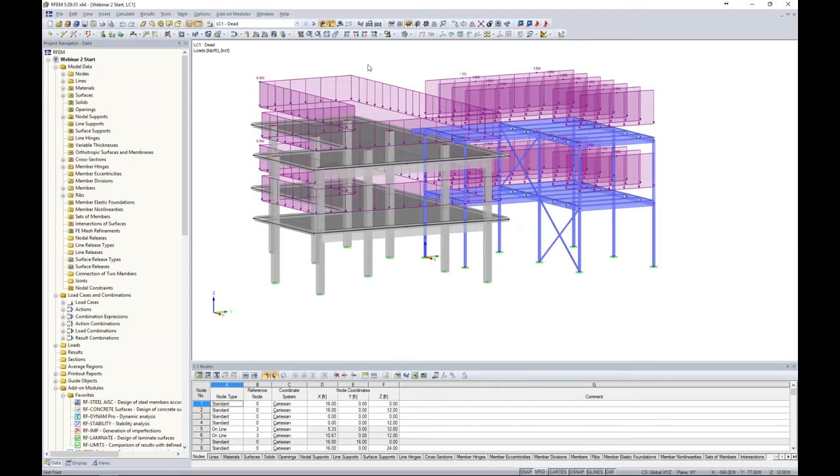Previously we loaded the structure, ran our load combinations, and got a full analysis. Now that isn't always the case - sometimes we go to run an analysis after loading our structure and issues arise. For example, we've loaded our structure with dead load here. Previously everything ran great, but as we know with any finite element software, that doesn't always happen. When we go to run this first load case, running according to a linear analysis, we immediately get an instability.

Instabilities are nothing new despite what program you're using, but I want to show you features that make our lives easier within RFEM. The first thing to know is the text about the specific instability. It says this model is unstable - the instability is found at FE node number 64, direction Z. So it immediately gives me a location and tells me there's some type of issue in the global vertical direction.

The model is statically underdetermined. When I close out of this error message, you'll see that my big red arrows show me exactly where FE node number 64 occurs. Now, I'm not going to say that 100% of the time this big red arrow is going to point out our issue, but a lot of the time this really is where the issue is occurring.

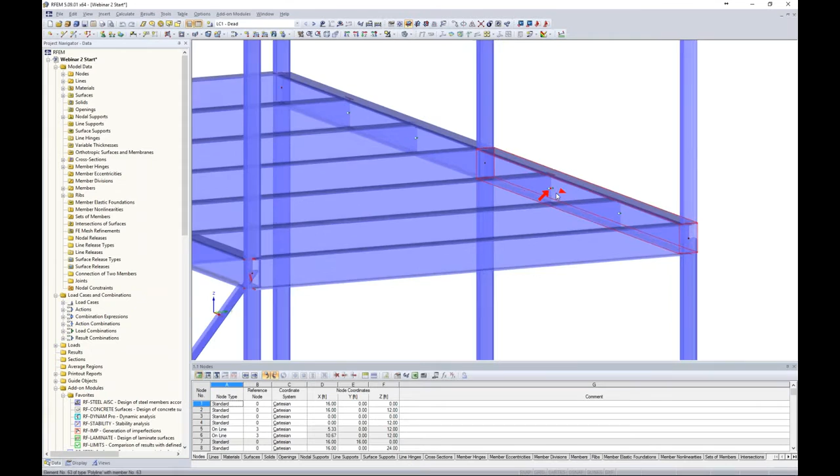So when I scroll in here, I really don't see anything immediately. When I turn it to a wireframe model, okay, well, I can zoom in here and see that I forgot to connect my node here of my beam to my transverse beam. Well, that's no problem at all. I can just easily drag and drop that to connect those two members.

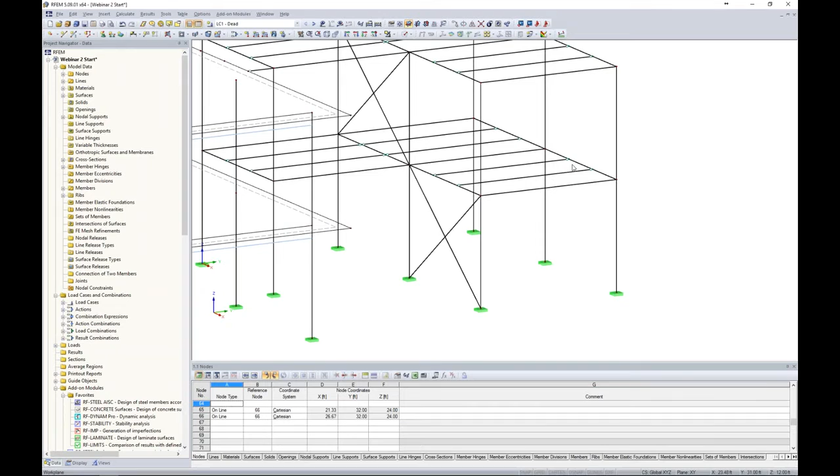So you can imagine that when we have a huge model with a lot of members and we get this error message for an instability, that red arrow is a huge benefit to really narrow down on where that issue is occurring rather than it being like hunting for a needle in a haystack, trying to determine maybe if a node isn't connected someplace.

So now we can go and run our load combination again, or this is our particular load case. We run it. Everything appears to run okay this time. We immediately get our deflections here, which we can decrease the deformation factor. So that's great, but now we need to run our first load combination, 1.4 dead load.

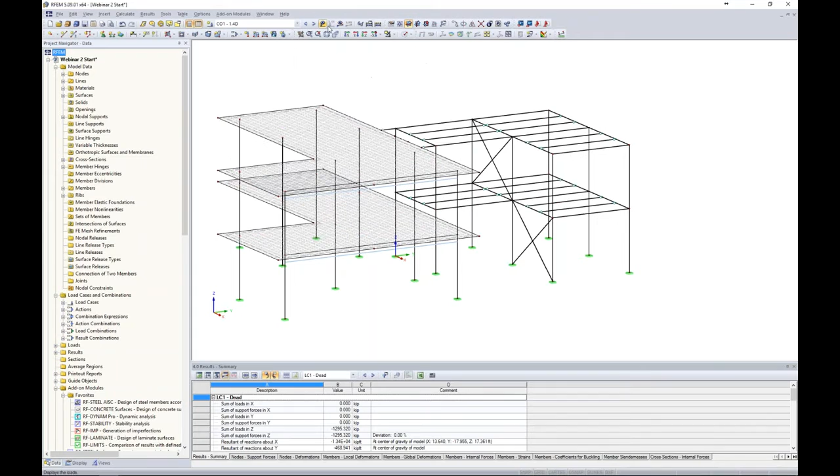So this is just a load combination from the ASCE 7. I take a look at my applied loads. It's applying that 1.4 factor to all of my dead loads, our surface loads and line loads here. And maybe turning this back into the rendered view, I begin my first load combination analysis.

And lo and behold, we get another error message. So it's another instability, but this time our text is a little bit different. It says our model is unstable and the instability is found at this location, direction X. So we have a bit of a different direction that it's being affected now. But this says a specified load is greater than the critical load. So this tells me that at this particular location I probably have some type of issue with buckling, because the specified load is greater than the critical load.

Well, I can close out of this error message and zoom into this big red arrow here. Maybe I turn this into wireframe. I see that everything is connecting fine. So I don't really understand where this error message could be coming from.

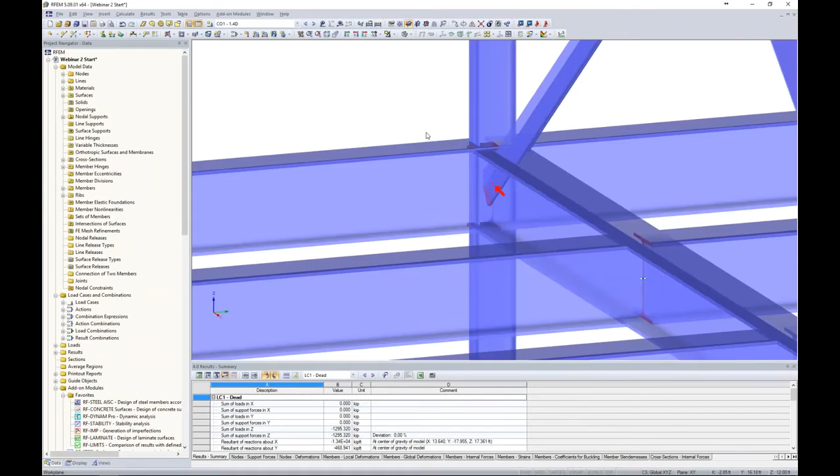Well, this is where we can utilize our add-on module RF Stability. So from our long list of add-on modules over here on the left in our project navigator, we can launch RF Stability. As you can see, this is just a simple dialog box that pops up within the program, and it allows us to do an eigenvalue analysis for a few different eigenvalues based on the buckling behavior of our structure. And what we can do is import different axial forces from either load cases or combinations.

Now, because I was able to solve for my first load case, dead load, just fine, it makes sense to import in those axial loads to see how the structure is behaving based on those applied axial forces. Now, we have quite a few other settings here that I won't get into in too much detail, but we do have an option down here that I can calculate an eigenvector for an unstable model. So this is if I couldn't get the model to solve at all, so that the causes of the instability can be checked graphically. So this is a feature too if we couldn't even get our dead load to solve.

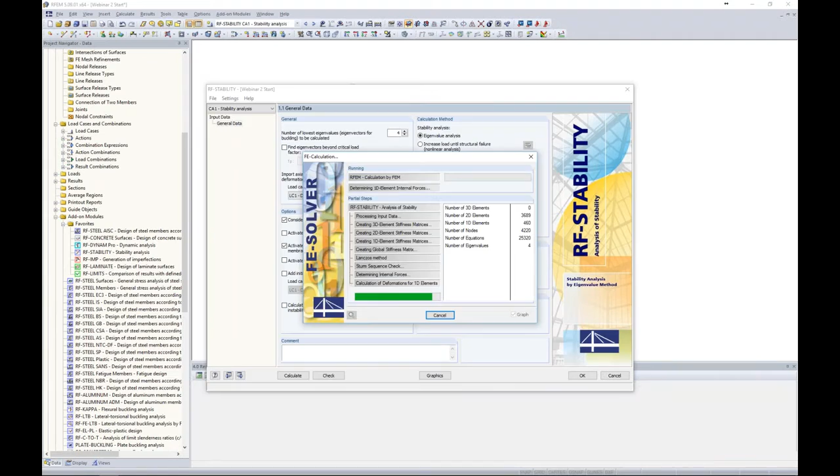Now for this, I will run the calculation, and it quickly runs the different 4 eigenvalues. I'll now see my results available in my tables here. So you'll see I'll have 2 different columns. The first is the critical load factor.

Now the critical load factor is just a factor that I can multiply that applied dead load by before I'm going to see the associated buckling behavior. We have 4 different eigenvalues, so the critical load factors are listed here in ascending order. So probably our most important one would be this first eigenvalue. Now the magnification factor is just a relationship between the moments of a linear static analysis and a second order analysis. So essentially, my first order moment times my magnification factor is going to give me my second order moment. But now we're a little bit more concerned with this critical load factor.

So if I take a look at my graphics, we're still in this add-on module RF Stability. We can see with our drop-down box here, I have my 4 different eigenvectors. Looking at the first eigenvector, we can see the buckling behavior of this structure.

Remember, I can only multiply my dead loads by 1.03 before seeing this type of behavior. If I look at the other eigenvectors, same type of behavior. It all has to do with these slender columns here. So when I multiply my dead load by 1.03, I see this buckling behavior. So when I'm trying to run 1.4 times my dead load, that's where our instability is coming from. These members simply can't handle the applied loads.

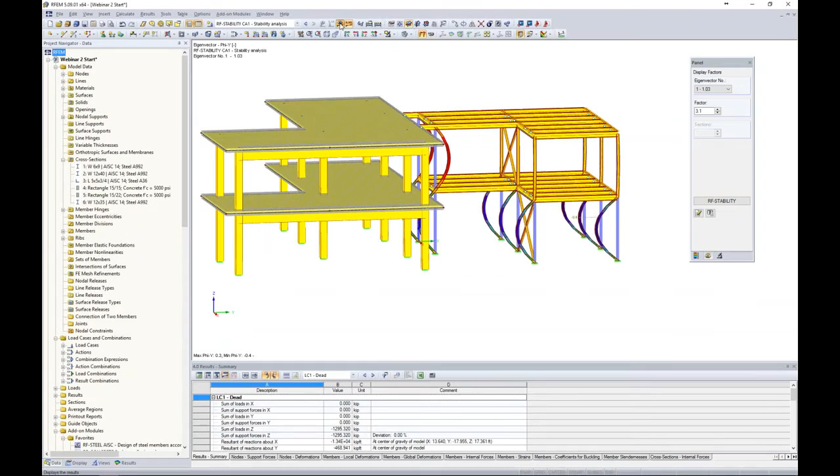So back under my Data tab, at the very top is all of my input data. I can take a look at my cross sections, for example, maybe turn off my results here from RF Stability. I click on my first cross section defined. It's a W6x9, a very small number. So perhaps I want to increase that to something a little bit larger.

I can just right-click and edit all of these cross sections at once because they're assigned to a single cross section within the program. Open up my cross-section database, and here are all of my AISC shapes. We would like to choose something more like a W10x49, much bigger than a 6x9. Still A992 is okay, but obviously we're going to have a bigger cross-section here.

I click OK. It's asking me to clear my results. Now when we go to run our 1.4 dead load, run the analysis, everything should run fine because now we have a little bit more of a sturdier member there and we don't see that same buckling behavior. So you can see how RF Stability is extremely useful, not just if you have an instability, but if you want to see the different buckling modes of your structure. I did a few other webinars where I utilized RF Stability to export imperfections as well.

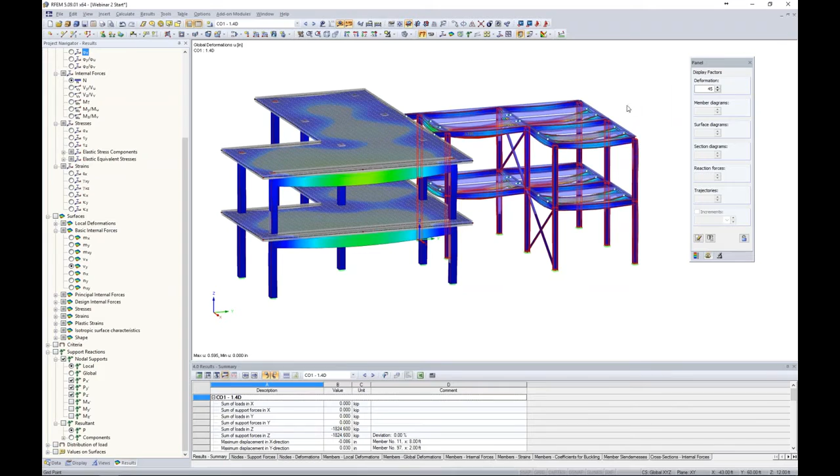Okay, so now that we've addressed instabilities, I'd like to move on to singularities. The first thing to do is turn off our results, and let's take a look at the top surface here of our concrete structure.

If I drag my selection box over that top surface, I can use my drop-down box here to create a visibility by selected objects. You can always right-click and show the hidden objects in the background if you'd like, or right-click and turn that off so we get a clean view of only the structure we've selected.

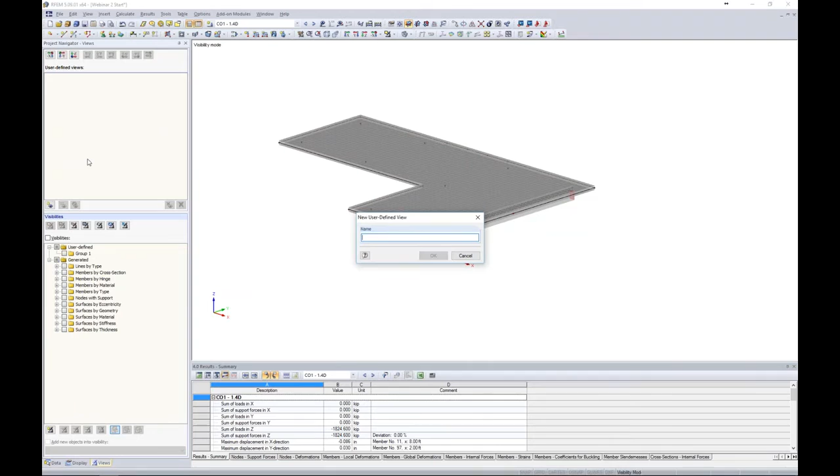Under Views, I can create a new visibility, and we'll call this Top Slab. I click OK. So now I have this user-defined view under Views that I can always refer to despite whatever view I'm currently in. So this is the case when we go to show the hidden objects in the background and show a wireframe view, that members are always 1D elements in a finite element software. Now our surfaces are 2D elements.

But the problem is that where we intersect this column to the 2D surface, the intersection occurs at this teeny tiny FE mesh element right here, a single node point. So we can imagine that all of our force transfer is occurring at this single point. Inevitably we're going to get very high stresses, very high forces. If we go to design this concrete slab, we're going to get high reinforcement simply because it's a product of the high internal forces at this location.

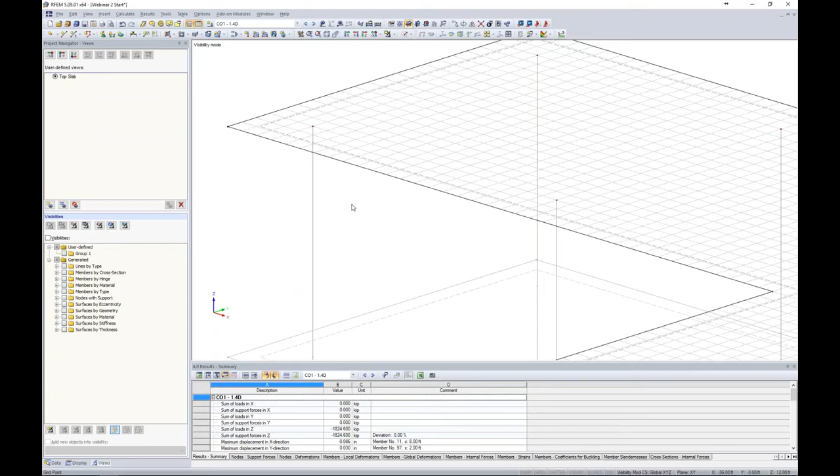Now in reality, when we render this, these columns are 15 inches by 15 inches, so we are going to get some load distribution. Like I said, this is not just for our program RFEM, this is common in any finite element software. So what tools do we have available in RFEM to help us address this so that we are not overly designing our structure?

Well, the first thing I'm going to do is jump to a different model here that I have saved, and I've gone ahead and used our add-on module RF Concrete Surfaces to do my reinforcement design. Now I have an entire hour-long webinar dedicated to just surface design using this add-on module, so we won't get into it today. But again, if you're interested in how we can do reinforcement design for this, refer to that YouTube video.

So once we run our analysis in RF concrete surfaces to get design per the ACI, we have our different required reinforcement. The first is AS1 in the top direction. Judging by this red arrow, we can see the reinforcement direction, and you'll notice that where these columns are framing into the slab, we have high reinforcement given there. The same goes for AS2 in the other direction.

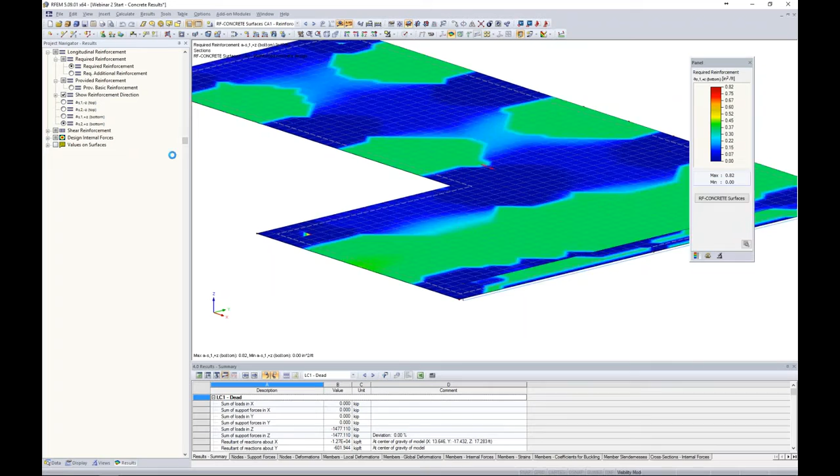Now, when we're looking at AS1 at the bottom, it's not the same, which makes sense. We have a lot of bending at the bottom of our slab between our columns, so that's where most of our bottom reinforcement is going to be. Same with AS2 at the bottom in the other direction.

Now, focusing on AS1 top for our slab with this particular reinforcement design, this is nice in terms of our contours, but perhaps we'd like to see this in a more numerical value. Well, we can do so with sections, and what we will do with our first section is up here in our dropdown, we can create a new section numerically.

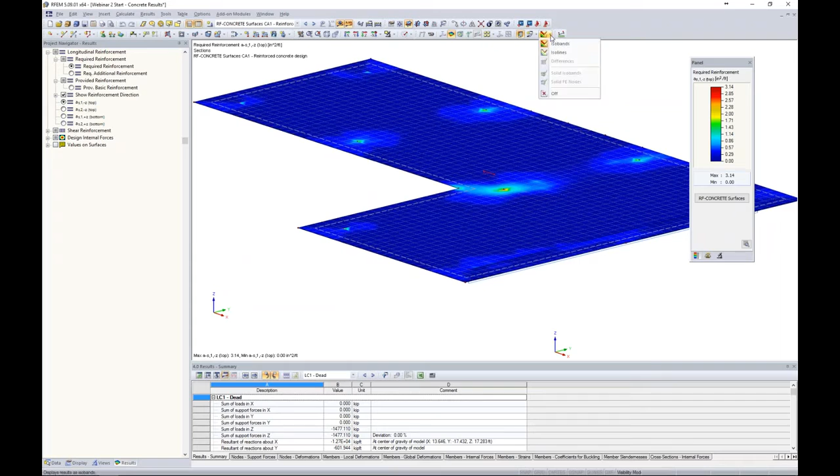But before I do that, right next to it, we have the option to completely turn off our ISO lines. These results will still be available, but I'm just simply turning off those ISO lines for the sake of making my section cut right down through the center of my slab. A section is exactly what you would think of it. It's going to give me the internal forces or my results at that particular location. So we can create this section numerically.

Now, the first thing I need to do is give it a section name, section 1. It will be a section cut through my surface, and I can apply this to my single surface number 2 here by clicking on that graphically.

The next thing to define is my start and end points for the section. What I like to do is maybe turn on my drawing grid down here, and I can activate that, change my origin for my drawing grid, and choose my 2 points here by zooming in, right down that column line. My second point will just be located at the second end of my slab, and because of those AutoCAD-like features, the program does a great job of snapping to those points I most likely would want to place my section.

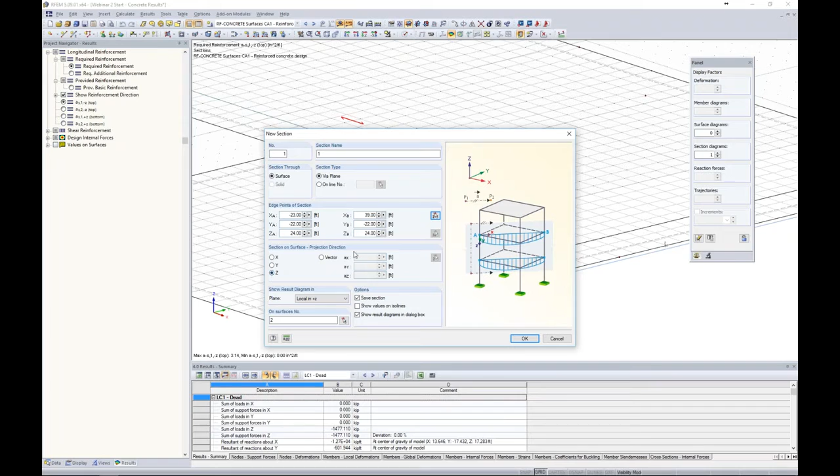Now, the section on surface, the projection direction, we can have it in the global X, Y, or Z orientation, or we can define our own vector if we want it at some type of angle.

Once I click OK, it immediately brings me into the results diagram for my section, and you'll see our exact same results that we were viewing in RFEM, and in particular, we take a look at our reinforcement design per RF concrete surfaces. Here are those spikes in reinforcement where our columns are framing into our surface. I think we can easily say that this is being over-designed for those internal forces.

Now, I can always exit out of here and view these surfaces, as you can see graphically on my surface as well. So going back to the results diagram by right-clicking, I want to show you guys a useful feature called smoothing ranges. Up at the top is the option to edit our smoothing ranges.

Now, my first column occurs 3 feet from the edge of the slab. My second column occurs at 20 feet from the edge of the slab, and my third at 41 feet. So what I'd like to do is smooth out the range, maybe 1 foot on either side of the column for a 2-foot range there. This is to account for the load distribution that's occurring, which in reality the program's not accounting for.

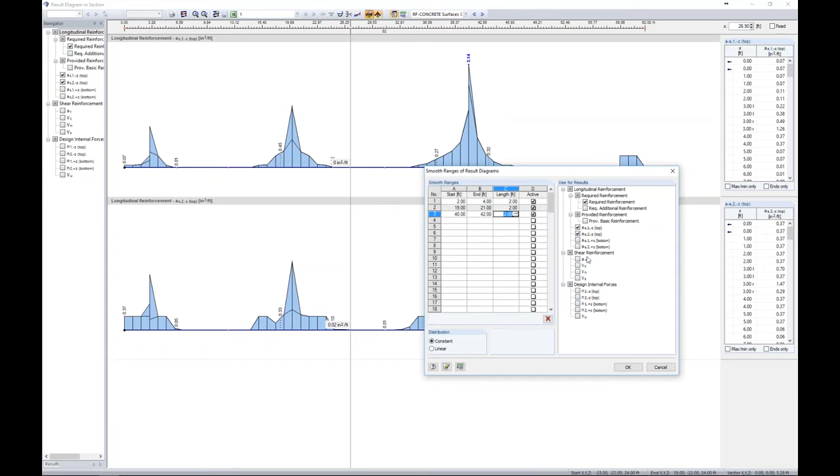So what we can do is define our different ranges. For example, for our first column, the beginning will be 2 feet and the end will be 4 feet. The program automatically calculates the length as a total of 2 feet for that first smoothing range. The second will be from 19 feet to 21 feet, and lastly, for our third column, it will be from 40 to 42 feet. The program automatically assumes that we'd like to apply these smoothing ranges to what we're currently looking at, but we can always activate and deactivate different results available here. So now when I click OK, you can see the smoothing range applied.

For example, column number 3, we went from 3.14 inches squared per foot to 1.65 inches squared per foot. This is extremely useful since we can print this to our printout report. We can even use this drop-down box to pull up one of our other load combinations.

I'm going to clear out all of these result diagrams and just activate my MX and MY. Again, we're seeing those spikes in internal forces here. I can go back to my smoothing ranges and simply activate the checkbox for MX and MY for all 3

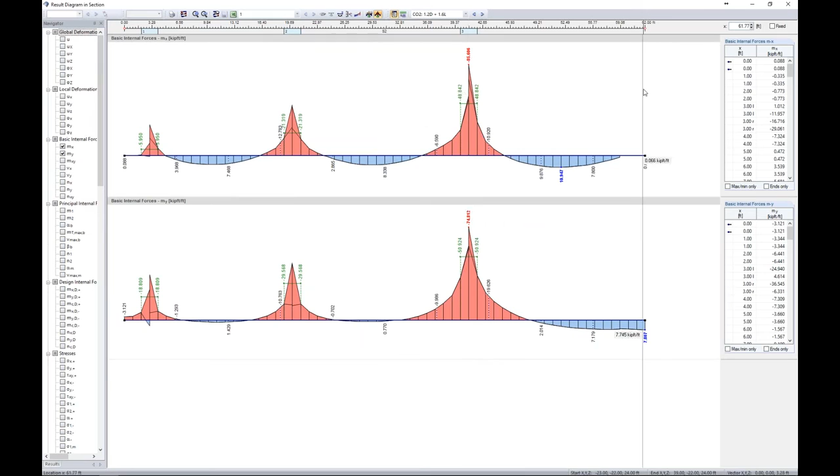of these ranges. So now when I click OK, you're going to see the smoothing range applied here as well. Now, one thing to note, if we jump back to RF concrete surfaces, for example, the smoothing ranges are shown here, but if I were to exit out, they are not shown graphically here within the model.

So the question is, that's great, but how can we apply this so that the program actually designs for those average forces rather than us just putting a fictitious number after our results are shown in the smoothing ranges? One thing I forgot to mention, if we take this section cut and highlight it, hold down our control key, maybe we want to copy it down this other column line to give us some perspective on some high design forces at this location.

So smoothing ranges are great, but if we go back to our data tab, we will see these sections available here. We have section 1 that we just created, and here's our second copied section. There's another feature called average regions.

So if I right click, I can create a new average region. Now for this, we want to apply it to a particular surface, so I graphically select surface number 2 here. You'll notice that I have 3 different forms I can select for my average region: a rectangle, a

circle, or an ellipse. For our particular case, our columns are rectangular in shape, so it's probably most beneficial to use a rectangular averaging region. But maybe you have a circular column framing into this slab, so that can be utilized as well.

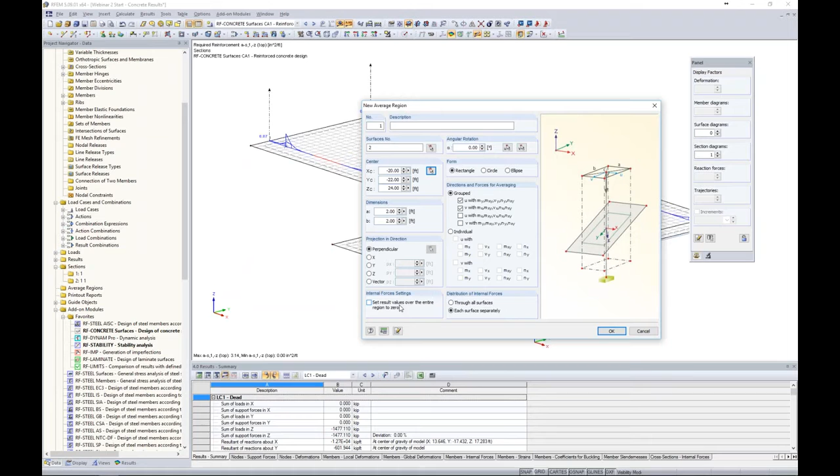The internal force settings even give you the ability to set all result values over the entire region to 0. This might be beneficial if we're checking punching shear for a column and we're really interested in the shear at the critical shear section, and we don't want to design for anything within that critical shear section. So if we click OK, then we will get our first average region.

Now, to make this very clear what we're doing, I'm going to jump to one of these particular load combinations, and under my results, I'm going to activate my sections. So we're still viewing our sections here, but for my MX forces. This isn't my concrete design now, this is my internal forces MX.

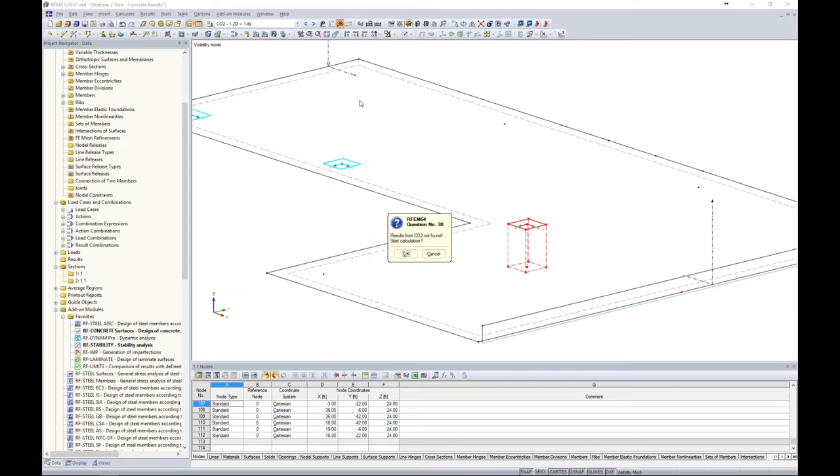Now with this average region, all I have to do is select it, hold down my control key, and then I can take it, drag it, and drop it. It's asking me to clear my results, that's fine, and drag and drop it to some other regions here. Now I can rerun that same load combination rather quickly, and we will see that average region now applied. Previously this was something like 83 kips per foot, so you can understand that this is now going to give us less internal forces.

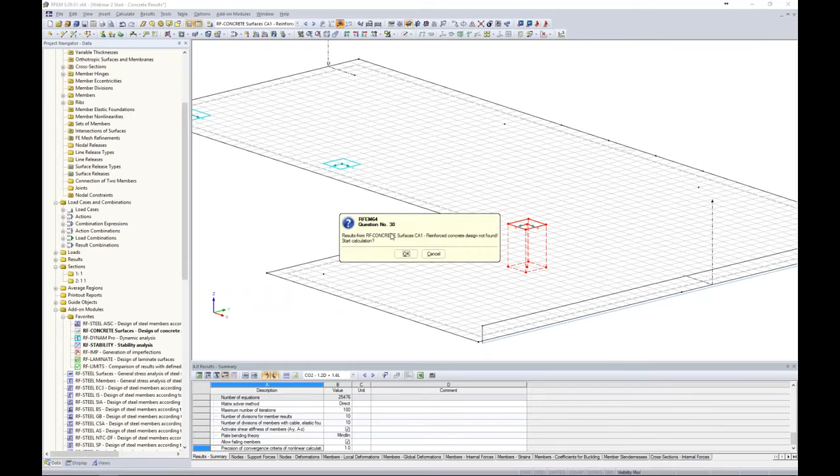Now if we jump back to RF concrete surfaces, it looks like we lost our results here, so I'm just going to quickly rerun that.

All this is doing is applying the ultimate limit state designs for all of my load combinations to do my reinforcement design. But what I want to show you with these average regions is that my AS1 top is still showing 3.14 inches squared per foot.

So this average region did absolutely nothing to help us with that. So why is that? Well, back under the data tab, under Concrete Surfaces add-on module - for a more detailed look into this add-on module, refer to our previously recorded webinar. But when you are using average regions for concrete design, under the Details tab, this option is default to be checked off.

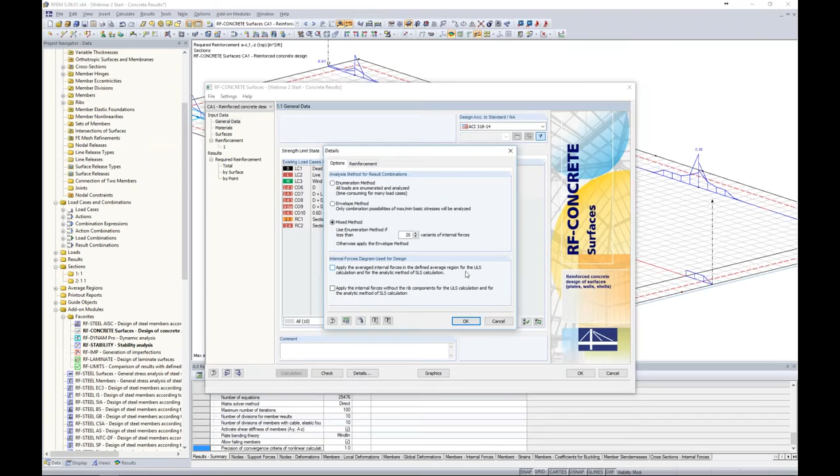What we'd like to do is apply the average internal forces for our ultimate and serviceability limit state designs, so now we want to check this checkbox. I click OK, I click OK. We've lost our results again, but we can easily run a quick analysis, which solves rather quickly because now it's taking those average internal forces to give us our reinforcement design. So now we have gone from 3.14 to 1.83.

So this is how we can apply those average regions to address singularities within the program, especially for something like concrete design. Okay, so that is what I wanted to look at in terms of singularities.

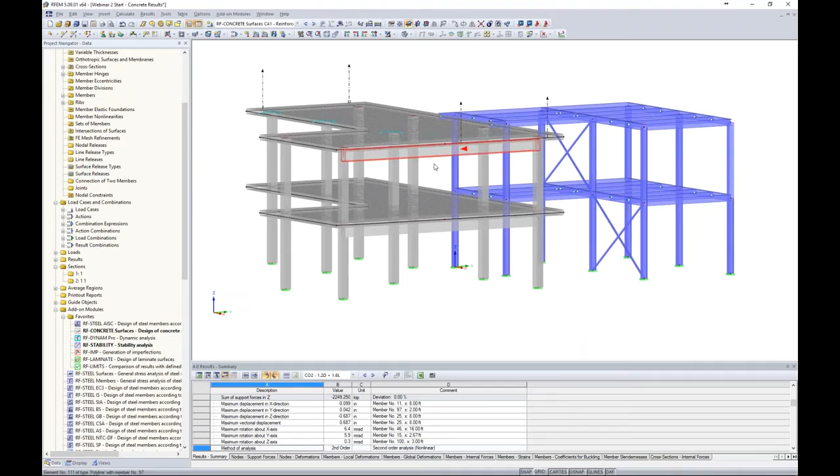Now, switching topics, I'm going to cancel my visibility mode here and render my model. In RFEM Webinar 1, if you were present, we created this beam member here, and it's actually a rib because we wanted to span from this column to this column, but we didn't have an intermediate column, so we thought it'd be best to apply a rib member there.

Now, if I were to double click on this rib member, you can see that the member type is actually set to that. Previously we had defined effective widths for this rib member to take that into account for analysis, but also designed for our reinforcement per the ACI.

Now, let's say we have a situation where we actually have a precast element, and the precast slab is sitting on this precast beam - it's not a monolithic pour like what we'd see with a rib type member. In reality, I want to fully release the moment. Maybe I still have resistance for my lateral movement and my vertical movement, so X, Y, and Z is fixed, but no moment will be transferred between the two.

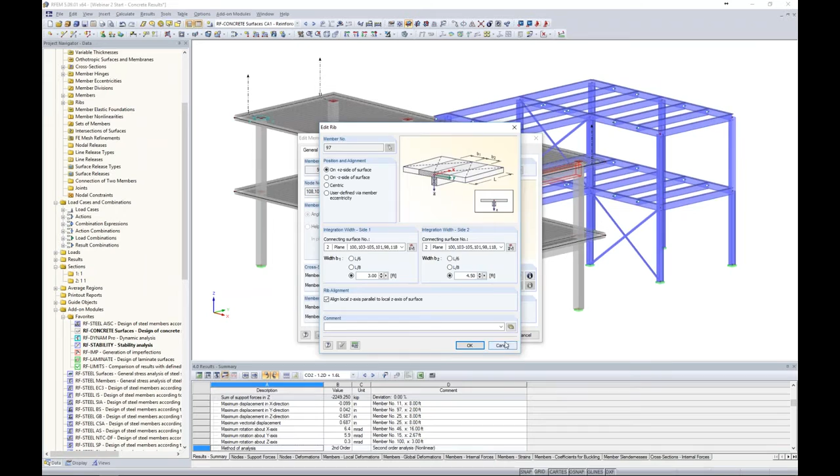So what I'd like to do is not have this set as a rib, but set it to a beam member. Now when I click OK and it asks me to clear my results, I take a look. My typical member is modeled directly at the center line, the same center line as the slab. But in reality, I'd like to still drop this beam down below the surface.

So how can I apply an eccentricity? If I double click this member, we have a tab here called Options, and that's where you'll see member eccentricity. Now we need to define a new member eccentricity. You'll see here that we have not only the local axis system X, Y, and Z for a member, we can also set it according to the global X, Y, and Z.

The local might come in handy because if we are modeling a member at an angle, we want to apply the eccentricity according to the local axes rather than the global. We can also apply this movement of the beam in X, Y, and Z, so not necessarily just vertical eccentricities, but left and right too. Typically with this situation, I would need to understand half the depth of my slab, half the depth of my beam, add those together, and manually apply my eccentricity. But we have automatic features in the program that can do all of that for us.

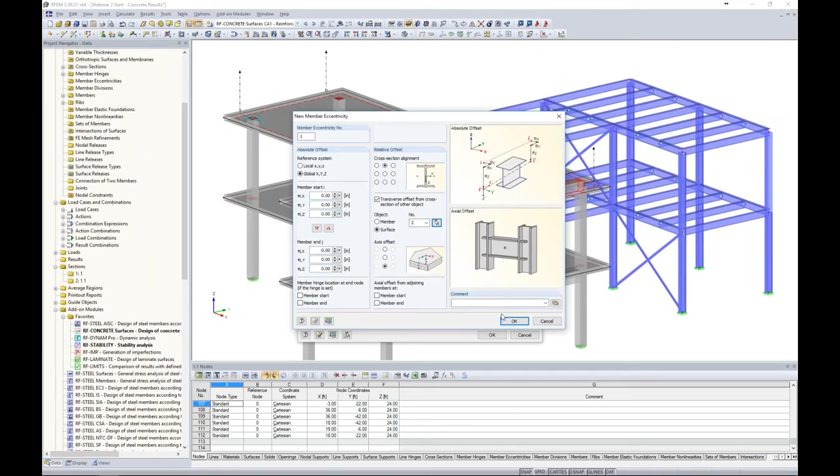You can see here that I have 6 different options of where I can select my beam to be, for the eccentricity to be applied to. This little red dot highlights exactly which option I've selected here. So I'd like the top of my beam, and I want to offset it according to a surface. Then I can graphically select my surface number 2 here, and offset it from the bottom of that slab. Now when I click OK through all these dialog boxes, we can see that beam was dropped down below the bottom of the slab. This is the same concept as the rib member, but now we're not taking into account that effective width.

One thing I'd like to do, I created this user-defined view of my top slab, and we want to render it again. What's going on behind the scenes, if we turn this into wireframe, is the program has dropped this member down below the slab depth, and it's applying little rigid links at every FE element along the member length.

The question is that these little rigid links have full fixity to transfer moment, shear, and axial forces, but remember, we're trying to alleviate these moment forces being transferred from the slab to the beam, causing high torsion within the beam. So how can we automatically do this without modeling individually these little rigid links, what we may have to typically do?

Well, in the program, we have a feature under data, and if I scroll up to my input data here, you'll see a line release. So what I can do is right-click to apply a new line release. The first thing the program asks me to do is define the line, and I will apply the line that I used to create the member.

If I try to click the member itself, it doesn't allow me to do that because that's not where the member was modeled - it was applied to this line integrated within the surface. Then we create a line release type.

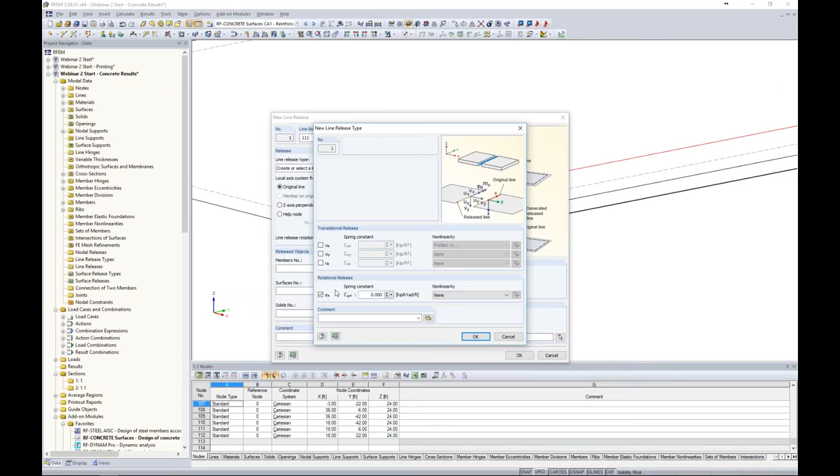Now, keep in mind that these are the local axes of the original line. Surfaces have their own local axes, our beam has its own local axes, and so do our lines. So we're not releasing any of the translation or rotation directions of the beams or surface, but rather the line itself. We are going to completely release this rotational release, phi x, and we can click OK.

We do need to define which is the released object. We will apply this to our surface number 2 again, and simply press OK, and we'll see the setting within the program that shows us that we have some type of line release, judging by this blue symbol.

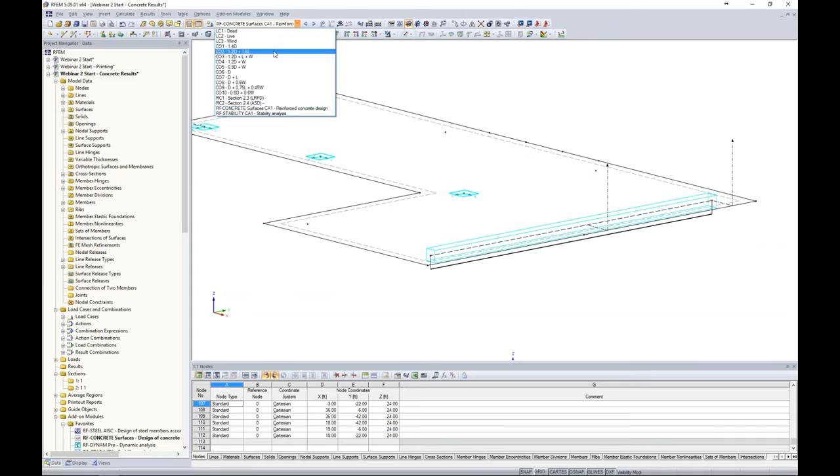So now if I were to run one of my applied load combinations, such as 1.2 dead, 1.6, we can run this load combination, and we're just viewing our initial view here. I'm going to turn off my surfaces, and we just want to take a look at our member design. I'm going to turn off my sections, and rather, we're taking a look at our members and our internal forces for torsion.

You can see here that we still have a small amount of torsion along the member length of 1.933 kip-feet. But what would this look like had we not released that particular moment along the member length?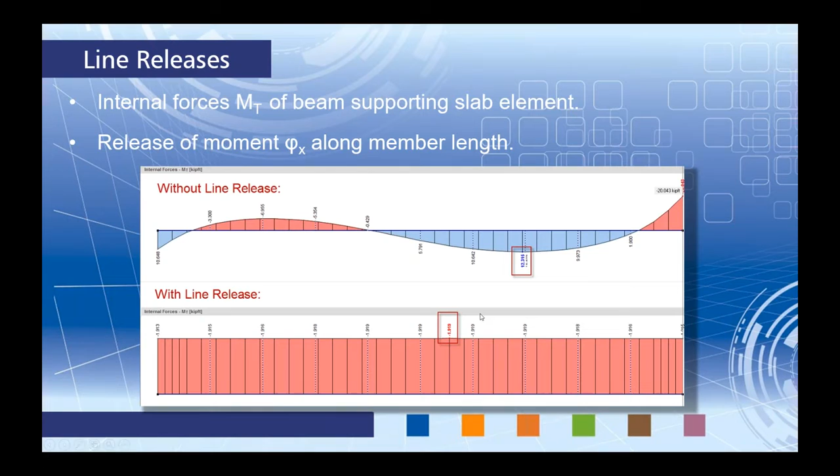So this is how we can effectively apply line releases in the program if, for example, we did not want to connect our surface to our beam element.

Changing topics once again, I want to move on to result beams. For this, I am going to cancel out my visibility mode here and render our model.

Let's say that I'm interested in only my concrete structure here, not my steel structure, and in particular I want to know what the story shear forces are, without incorporating the steel beams. So how do I easily pull that information from the program? This is where something like a result beam will come in handy.

So what I'm going to do is first create a new user-defined view here, using my drop-down box, visibility by selected objects. Keep in mind that behind the scenes, when I show my hidden objects in the background, this steel section is still here.

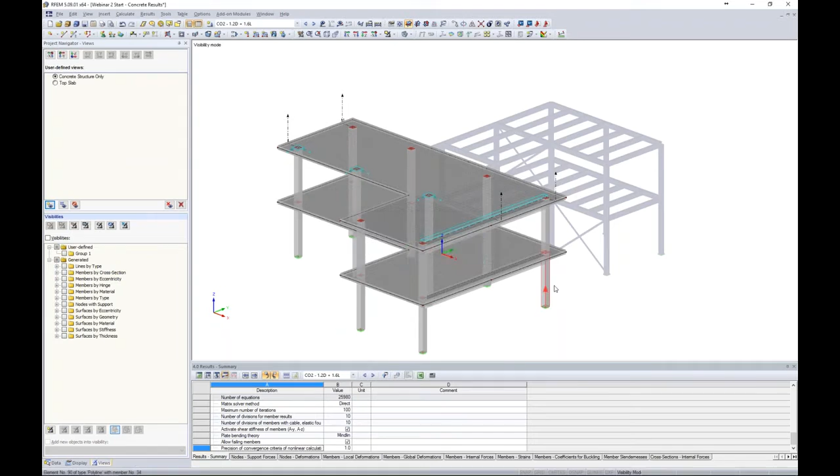So under my views, I can create this new user-defined view. We'll call this one concrete structure only. I click OK, and I'm going to turn back on my grid and redefine the origin at the base of my structure. I'm going to hold down my control key to select these two members, and holding down control again, copy them and drag and drop them to a location parallel to the concrete structure.

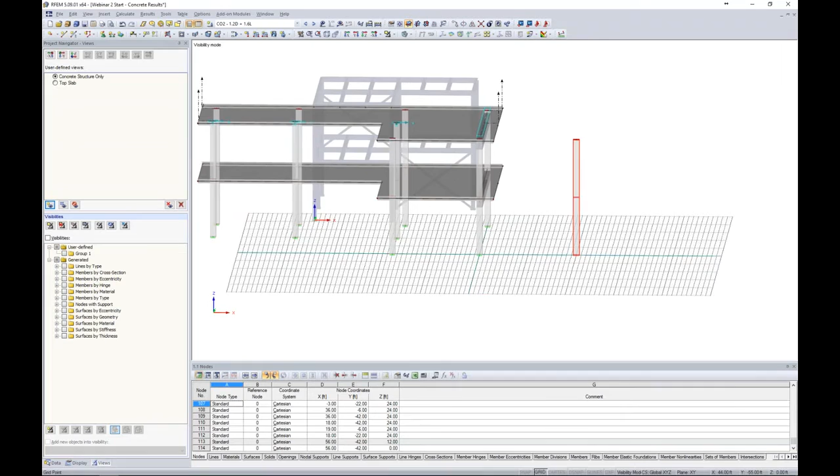So what I'd like to do from here is select these two members, right-click to edit them. Under the member type is where we can choose result beam. A result beam is simply going to take the information from other objects in the model and apply it so that we can view the analysis results as a member internal force.

Now, result beams don't add to the stiffness of our structure. We're not applying them to an analysis - it's just simply a different way to view our results. As far as a cross section, it doesn't matter if it's concrete, steel, aluminum, or your own user-defined section - you can choose anything here. You'll also notice I don't even need to put a support at the base of this column section. What I need to do here is define some additional information.

As far as result beams, we have 4 different options. The first is within a cuboid quadratic. This uses a quadratic integration area where the centroid of all the elements I'm trying to incorporate within this result beam needs to be located within the member's axis - meaning the axes of our actual result beam shown here.

I'm not going to use this option today, but we will be using this second option as our second example - within a cuboid general. This will apply a rectangular integration area where the centroid can vary according to the local axes of our member.

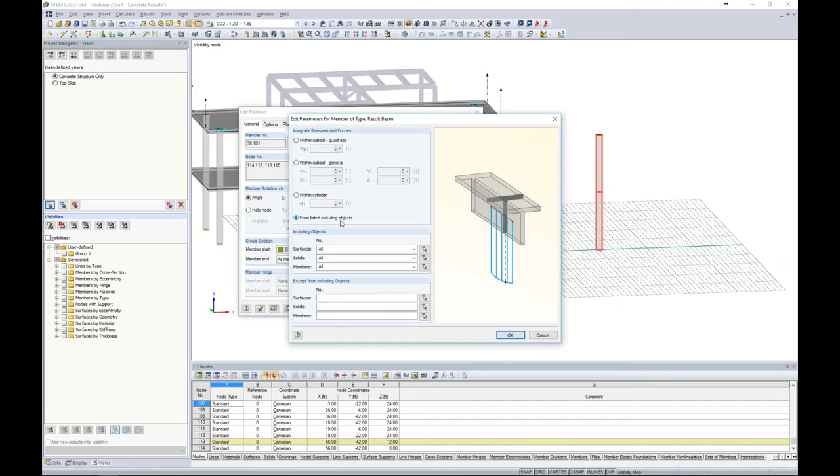So here is where I'm going to start off with my first example of a result beam. What I want to do is select my surfaces that I'd like to apply to this result beam, so I can just highlight everything. My steel is in the background, but because it's not selected, I don't have to worry about selecting anything from there. As far as solids, we don't have any, so we can leave this either as all or none. And for members, we want to graphically select all of our concrete members here.

I click OK. We can even exclude any objects from our selection if we'd like to here. I click OK, I click OK.

Now I'm going to run one of our load combinations where I have a lateral load applied. You can remember from webinar 1, we applied a wind load in the Y direction here with some gravity loads. So if I run this first load combination, you will notice that after the result is complete, I have my member over here with some results as well.

So what's exactly happening? Well, I want to view my results on my members like I would any other member within the model.

What this is doing is incorporating all of my objects here and applying it to my result beam. Just to summarize what's exactly going on.

As far as viewing my shear forces in the Y direction, and this is the local Y direction, I can always right click and turn on the local axes of my members to understand exactly which direction I'm looking at here.

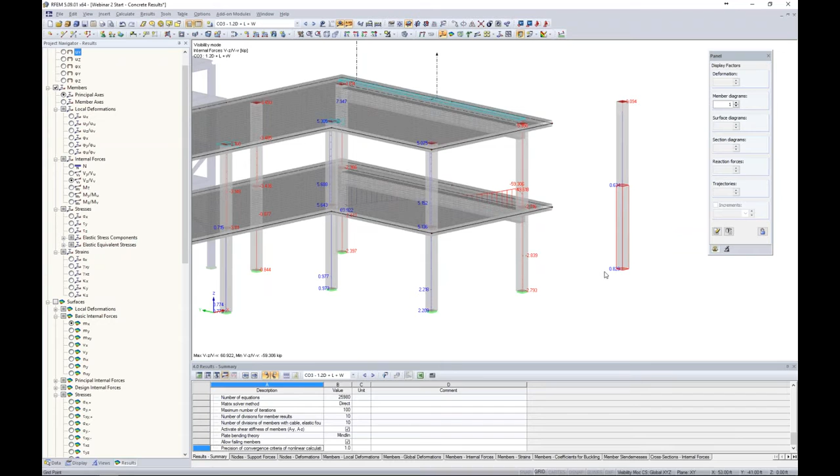The local Y is going to give us my story shear information. For example, the top story is going to be 10.46 kips for this particular load combination. My first story shear is going to be 39 minus the 10, and finally I have my base shear given here at 48 kips. If we take a look at our shear in the other direction, we hardly have any forces at all, that's just because we haven't applied any lateral loads to this. Now lastly, we can even take a look at our axial load.

So why would our axial loads be important? Well, if we're interested in the sum of our forces, I can see that for my concrete structure only, my sum of forces in the Z direction is 1,455 kips. Now this is different from my table down here shown in my results summary, which also gives the sum of the loads in the Z direction, but this is for the entire structure, including the steel structure over here. So again, result beam would be beneficial for only part of your structure here.

Now, the moments are not applicable in this case, and that is because we have moved the members of this result beam away from the centroid of the objects that we're interested in. So just keep that in mind when we're looking at something like moments, we can't get an accurate representation here. So I'll show you in just a minute how we can do so.

But first, I want to quickly jump back to the PowerPoint here to explain what's going on. So as you saw with a result beam, we're integrating the results from a list of objects. Now, these result beams only include the elements within a rectangular axis of the member start and end.

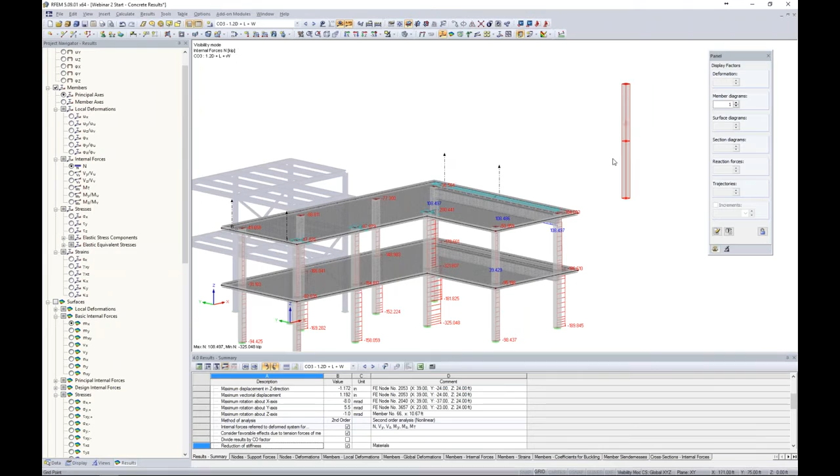Now, as we just saw with the axial and shear forces, the parallel distance from the centroid does not matter. So going back to RFEM, I can move this result beam every which way in the left and right direction. But if you take a look at what happens when I simply move it in the vertical direction, those results are now gone. That's because I did not move it in a parallel direction to the objects that I'm interested in. So that's the one way you need to make sure you're able to see your results accurately for your structures, to make sure it is parallel.

For example, if I'm interested in my top slab here, which we can go back to our user-defined views, and I really want to design a 4-foot wide section here on my slab, and I want to pull those internal forces from that 4-foot wide section. Well, a section cut isn't going to work here because a section cut only gives me my internal forces at that exact location, exactly what it is, it's a cut.

So in order to utilize a 4-foot section and to pull those internal forces, we want to use a result beam. So what we can do is create a new beam member here, and instead of the member type beam, we will choose result beam.

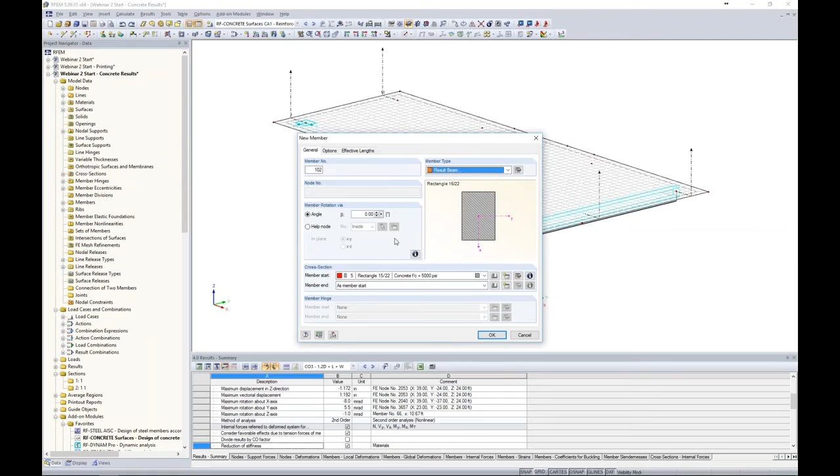And again, the cross-section does not matter. We could choose anything we like because we're not contributing to the stiffness of the structure in any way.

We want to move on to the details of this result beam, and this time I want to choose within a cuboid. So if I'm interested in a 4-foot section, that means I want to choose 2 feet on either side of my result beam, which is laid out clearly in this picture here.

As far as the vertical direction, this isn't as important because I don't have any members modeled above or below. I'm only interested in this slab, so 1 foot is more than enough. But if I had elements within this 2-foot vertical section, they would also be included in my results, so keep that in mind.

This list is no longer relevant because I'm using only this section up here. So when I click OK, I can begin modeling my new member. I will snap to the middle point of this line over here to make my result beam section right down the middle of this slab.

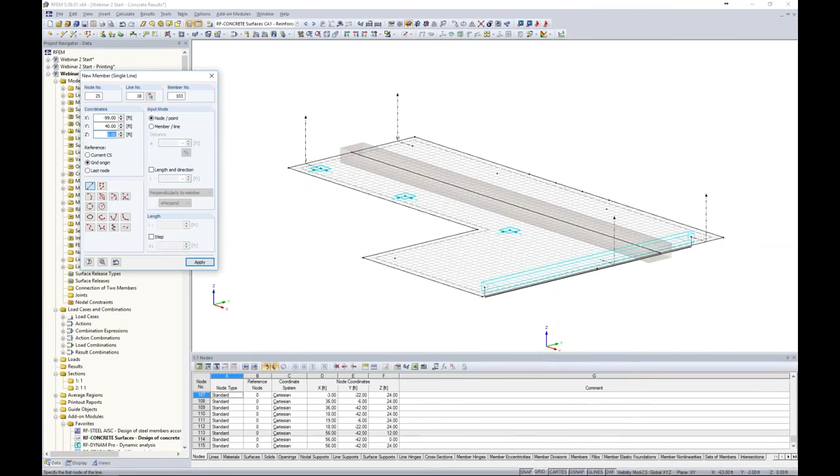You can see the program automatically snaps to the perpendicular section, just like what we'd see in AutoCAD. And here is my result beam. We can see that 4-foot wide section. We can even render this if we'd like a clearer view of exactly what's going on.

Now when we take a look at our results, I will run one of my load cases here - it doesn't matter, 1.2 dead, 1.6 live. I'm going to run the analysis.

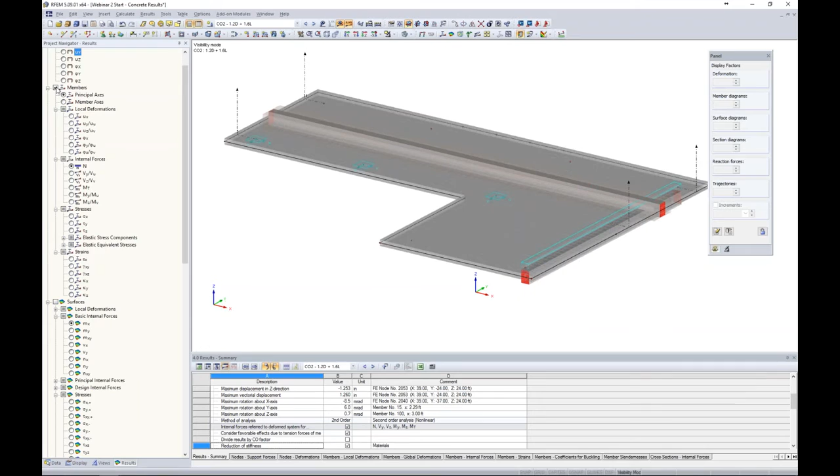As far as our result beams, we can view them as we would any other member, as I mentioned before. So the first thing we want to do is take a look at our member internal forces, and perhaps we're interested in the moment.

So let me turn this to wireframe view. Now our moments have a nice smooth diagram for my beam member here. So what's going on with this results diagram? It's pretty choppy.

Well, when you're using a result beam like this, under calculate, calculation parameters, we want to change the number of divisions of our members for result diagrams. The default is set to 10. Let's change this to something like 100. I click OK, and my results will inevitably be cleared.

I quickly run this analysis again, and we'll see that our results look much better. So that can impact the way you're viewing your results. You want to make sure and increase those numbers of sections if you see any type of discontinuities that we saw with the beam before.

So now we can see that our moment diagram is displayed quite nicely here for our strong axis. Remember, these are the internal forces for our 4-foot wide section, that we can take and go do our own design.

We can take a look at the weak axis bending here. We can even take a look at axial and shear forces. These are all relevant within this particular section.

But this is what I'm saying when you want to take a look at the internal forces of our moments - the centroid of our elements that we're interested in must be at the same location as our result beam's axes. So just something to keep in mind there.

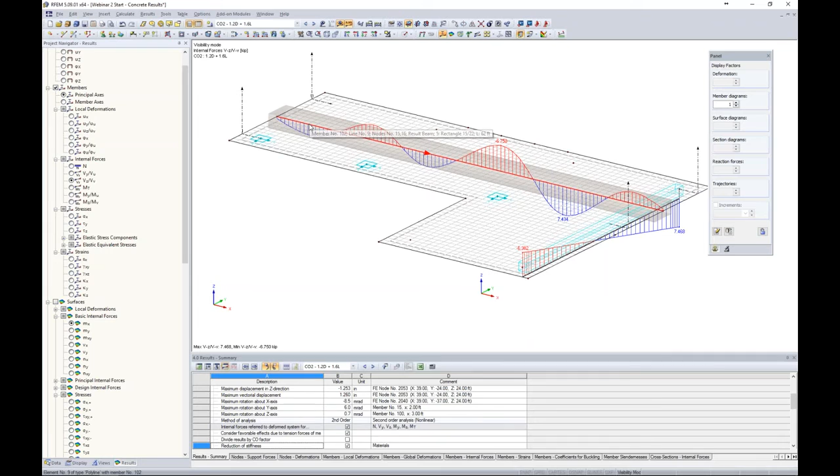Okay, so now that we have seen a bit more about result beams and focused heavily on our concrete structure, let us cancel this visibility mode to take a look at our entire structure. And I'm going to render it.

Maybe I'm interested in the steel structure, and in particular I zoom in here and want to take a look at this connection here. Now this connection is pretty straightforward.

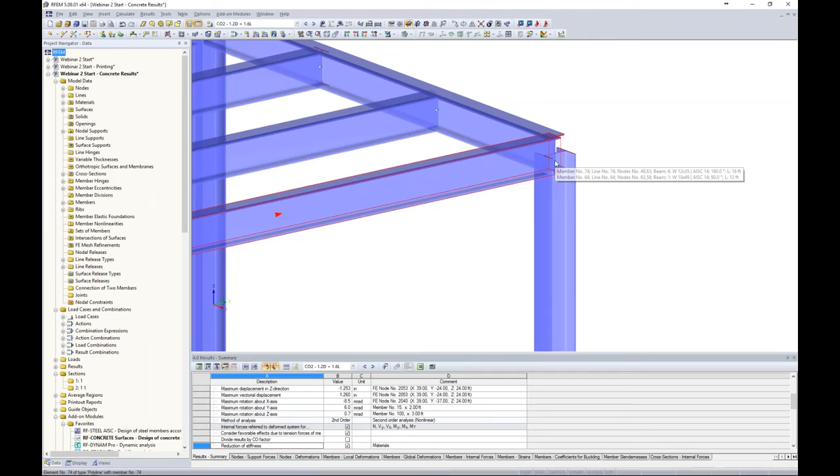We have members framing in at 90 degrees, but if we didn't - let's say we had tapered members, maybe members framing in at a weird angle - well, this might flag us to think, okay, perhaps we'd like to do a finite element stress analysis for this connection.

But if I turn this into a wireframe view, I cannot do a stress analysis of this connection because all of my members are 1D elements. So we can get stresses along the member length and the member as a whole, but not for this connection.

So what would we like to do about it? Well, the first thing to note is that this member, judging by this big red arrow shown here, the member end is framing into this node.

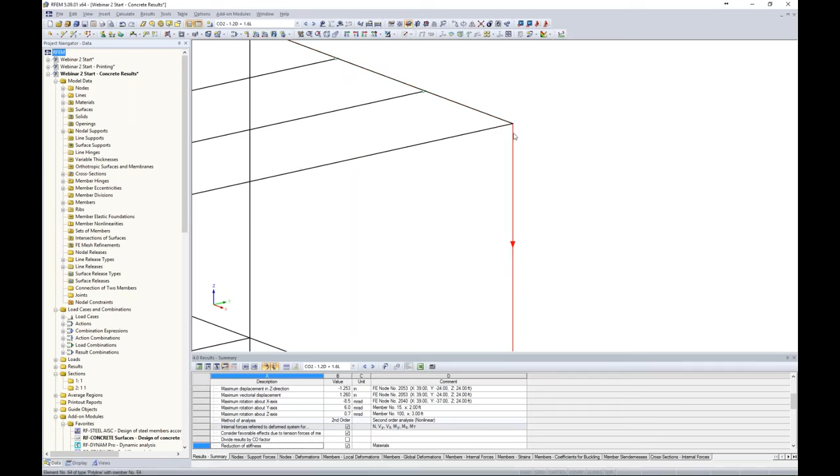The same with this member, but this third member, the member start is framing in at that node. So what I can do is just right-click to reverse the member orientation. Now all three of my members will be framing in at this single node.

I'm going to select them all, right-click, and choose to divide the member by a certain distance. Because I switched around the member orientation, the member ends are all located at this particular node, so 3 feet from the member end is where I'm going to divide it. I've done nothing more than create smaller members out of my initial member length.

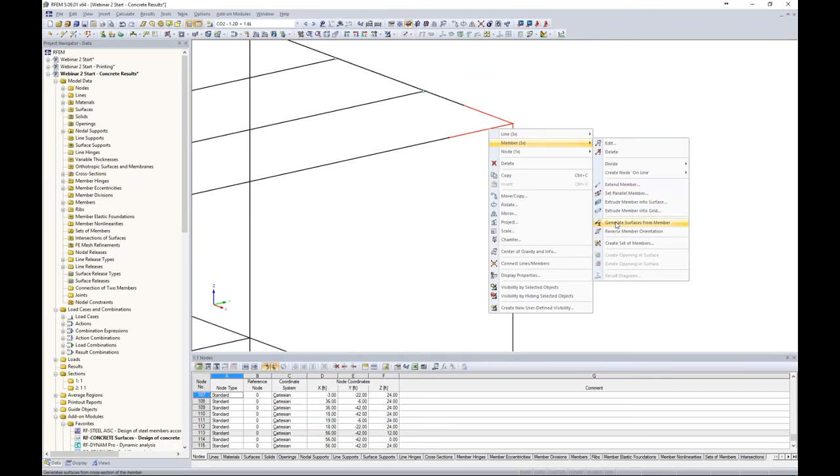If I render this, sure, we get this rendered view of our W section, but turning it back into wireframe view, I'm going to highlight all three of these members, right-click, and under member, choose the option to generate surfaces from members. So now we've taken these 1D member elements and turned them into 2D surface elements, which will allow us to do a stress analysis on this particular connection.

Now, the first thing I want to do is under my display, turn off my FE mesh refinements. I'll get into this later.

I wanted to mention that this W shape was previously a W12 by 35. This new W shape generated by the surfaces has all those exact properties. For example, the web surface here has a thickness of 0.31, taken from the W shape. All of my dimensions, materials, and thicknesses were taken from that member modeled previously, so I don't have to make any changes in regard to that.

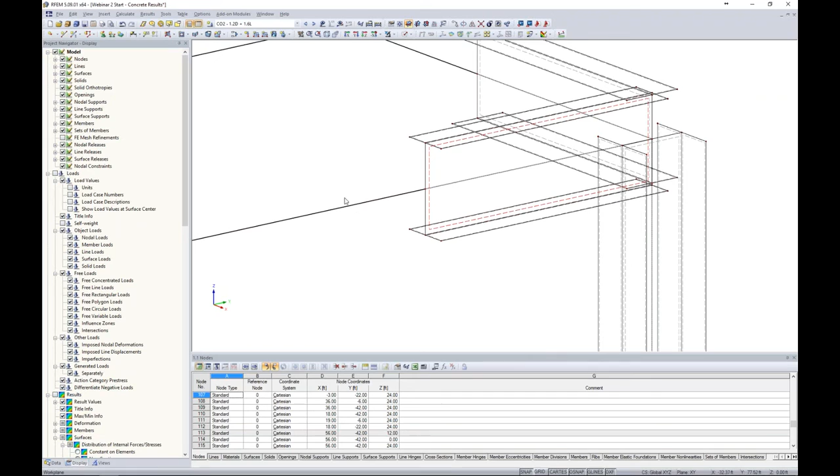What I do need to do is clean up the geometry a little bit before running my analysis. So I can highlight all of my members and create a new visibility by selected objects. Maybe I want to show my hidden objects in the background.

Now, this is a nice little trick even for our users of RFEM who've been using the program for a while. If you didn't know, you can select one of these elements, and if you hold down Alt on the keyboard, that will allow you to rotate about those selected elements. Just a nice little feature to utilize there.

Now, to clean up the geometry, I'm going to start by deleting these center lines. They're no longer needed. And you'll see that the column is a little bit low here, so I'd like to extend this up a little bit above my beams.

So how I can do this is to zoom in here, and I'm going to hold down my control key to select the 6 nodes that comprise the top of my column, and use my move tool. I'm only going to move this 0.58 feet in the Z direction, so 7 inches, and click OK. Now you can see the column was simply moved above those beams.

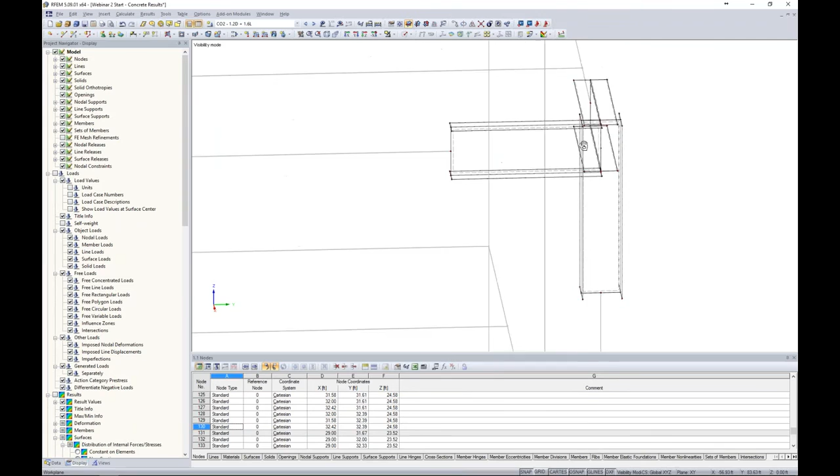Now the next thing is to move this beam on our left to the face of the column. That's pretty easy. If we rotate our model and zoom in, I can select these 3 nodes that entail the top of this beam and just drag and drop them to the snap point of the face of that column. Those AutoCAD-like features allow us to snap to the most important parts of the model.

Again, I do the same thing for the bottom. I simply snap to that point, and now I can see that beam is framing in quite nicely to that column. If I take a look at my rendered view, we can see that here.

Notice the rendered view of our 1D elements transitions quite nicely to those 2D surface elements. But with that said, if I look at my wireframe view, these 1D member elements are framing into this 2D surface element again at a single FE mesh point.

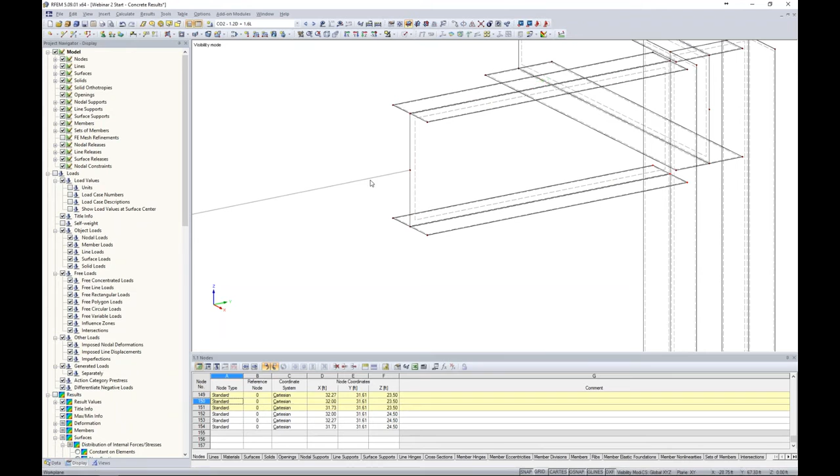This is a singularity. By no means do we want to use an average region here, because in reality, this whole load from this 1D member element should be distributed to the entire face of this column. So how do we distribute that load? Well, that's where we can apply just our little rigid plate here at the end of our member.

Under our surfaces in the drop-down box at the top, we can choose something such as a polygon. As far as the stiffness goes, I want to set this to rigid, so pretty high stiffness here, not infinite, but very, very high within the program. I click OK, then I can draw in this little rigid plate at the end of my member, and now that load will be distributed as such.

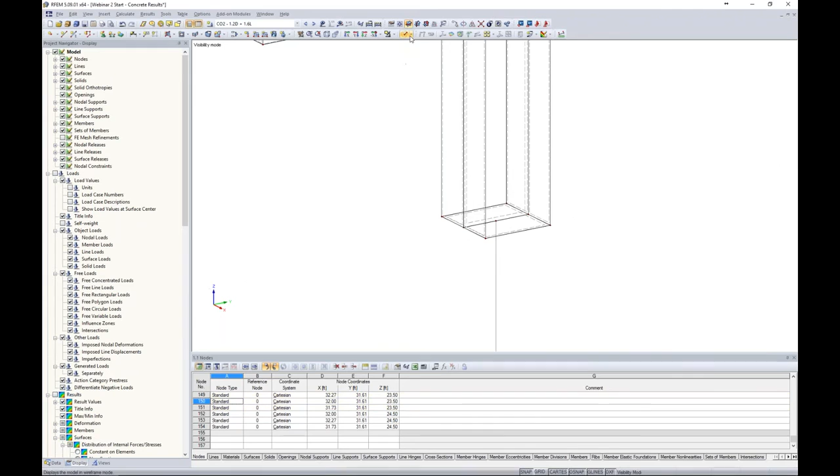The same goes for my other beam locations. If I don't take care to draw in this little rigid plate, then I'm going to get singularity issues at all these other locations. So I'm just snapping to the 4 points of my column. If I render this, I can see that these plates are shown with the pink color, which shows me it's a different material.

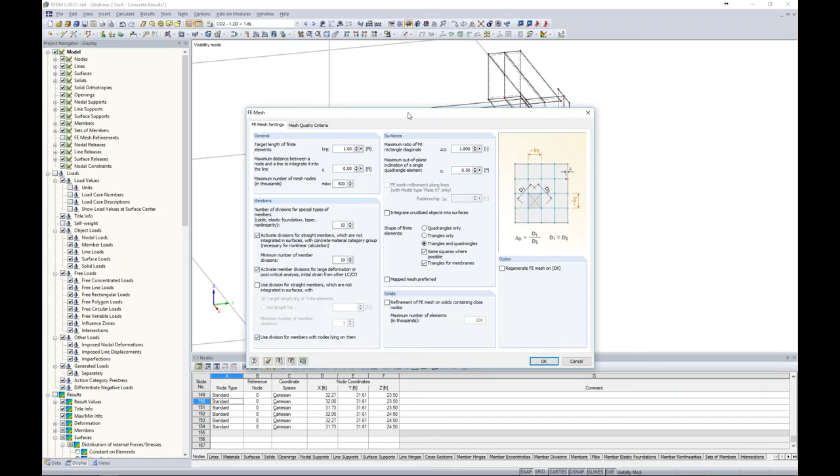Now a couple other things to take care of before we're ready to run our analysis. Going back to wireframe view, and taking a look under Calculate, FE Mesh settings, we see the global FE Mesh settings are set at 1 foot. Sure, 1 foot is great for our huge slab element of our concrete structure, but when we're looking at something as small as this connection, 1 foot is not ideal. So rather than changing this global setting, when I made that transition to these 2D surface elements, the program actually put in these FE Mesh refinements for me.

That's denoted by this little symbol here. If I double click on it, I can see that the FE Mesh was defined for each individual surface with a target FE length of 1 inch.

This is more beneficial because if I were to apply 1 inch to my global settings, applying a 1 inch FE Mesh to all my slab surfaces, my solve time is going to be much, much higher. The more FE Mesh elements you have, the longer it's going to take to solve. So it's in your best interest to utilize these FE Mesh refinements for situations such as these, where it requires a smaller mesh here but not anywhere else within the model.

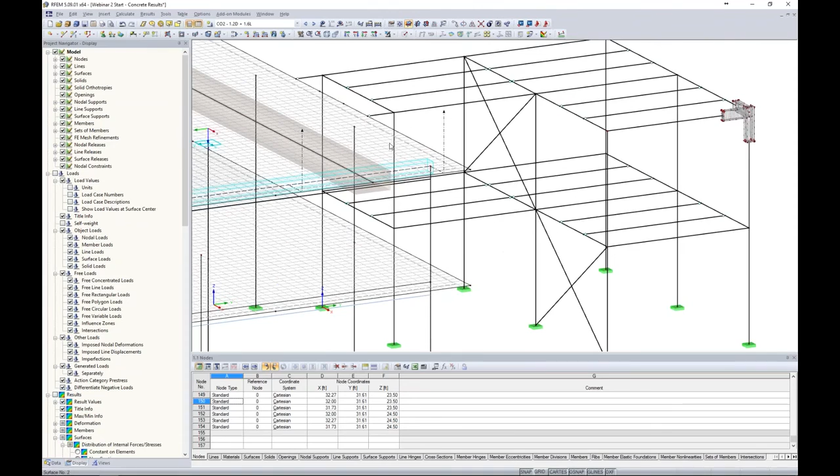Now when I go to Calculate, Generate FE Mesh, and let me cancel out of my visibility mode here, we can see the FE Mesh is automatically generated. Everything ties together quite nicely. I don't have to manually submesh anything here. But when I look at my concrete surface over here, I can see that the FE Mesh is still 1 foot, so that looks great.

Keep in mind, we can always apply our own FE Mesh refinements. For example, maybe I have some critical points where my beam is framing into my web, and I can hold down my control key to select 2 nodes. I can right-click to add an FE Mesh refinement. For this one, I create a new definition type, and we can see the node is automatically selected because the program knows that this is what we selected back in RFEM.

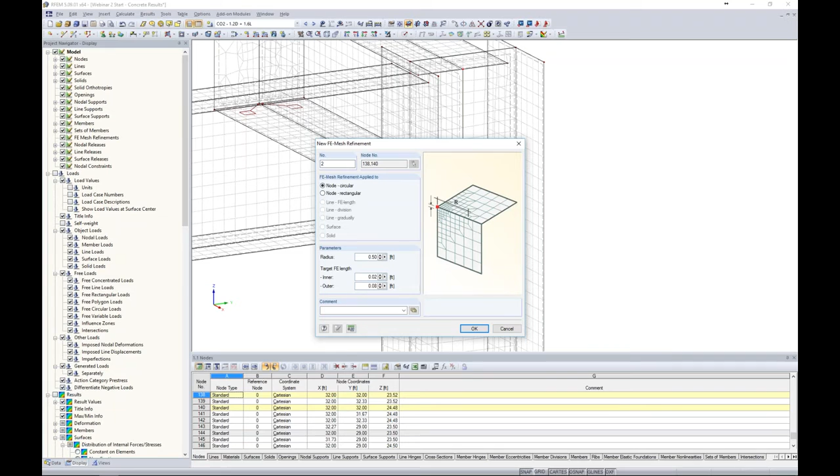We can give it a radius of 0.5 feet or 6 inches. Maybe our target length for the inner portion of the circle is 0.02, and the outer will transition back to that 1 inch of 0.08. I click OK, and now the program puts these symbols at those locations for my FE Mesh Refinement.

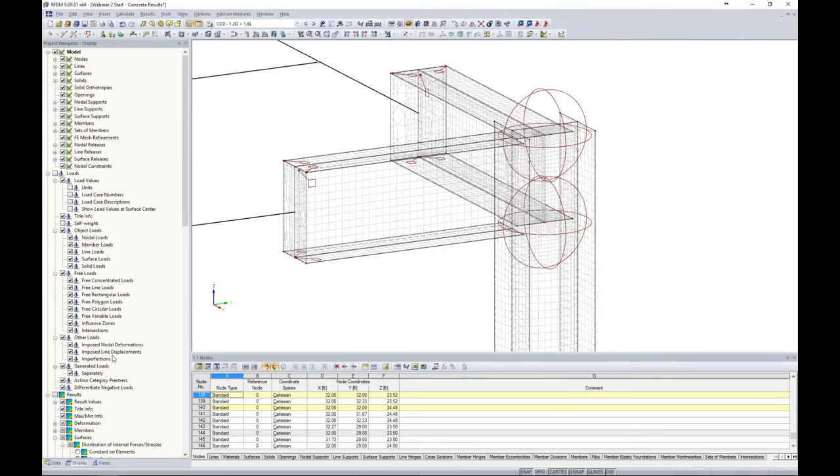I can go to Calculate, Generate FE Mesh, and now we can see that the program has created this smaller mesh at this particular location, and it transitions nicely back into our surface mesh. Under the Display tab, we can always turn off these FE Mesh Refinement symbols. The FE Mesh Refinement is still there, but we just don't need to necessarily see those big symbols.

In regards to our connection type here, originally I modeled this structure so that it has a fully rigid connection of this beam framing into this column's web. But maybe I go back and decide I'm going to have some type of weld here, and this weld is not going to have a full moment transfer. So I want to relieve some of those moments within the beam framing into the column web. How do I apply that to this connection?

That's where we can utilize line releases again. We're going to come back and apply line releases on a much smaller level here. Back under the Data tab, under Line Releases, we want to choose the option to assign a new line release graphically. I don't want to override my previous line release type, because this is my beam to slab connection that we talked about earlier.

So what I'm going to do is simply create a new line release, type number 2. I want to release this moment, but like I mentioned, we have some type of partial fixity here with the weld type we're using, so it might be something more like 40 kips per foot for partial fixity. I can click OK.

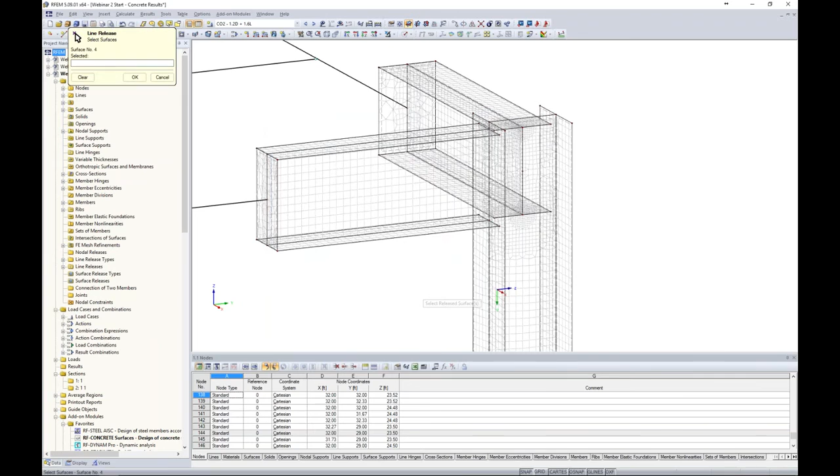The surfaces I'd like to release these lines from, I select my web element. I click OK, so now when I exit out of this dialog box, I can graphically select these lines where this beam is framing into this web. Now you can see my symbols showing my line release here, and under display we can also turn those off if we don't want to see them.

We're almost ready to run our analysis, but let's take one final look at our applied loads. We'll jump to our dead load and see our applied loads. These are member loads applied in kips per foot along our various steel members, but we no longer have members, so we lost those applied loads.

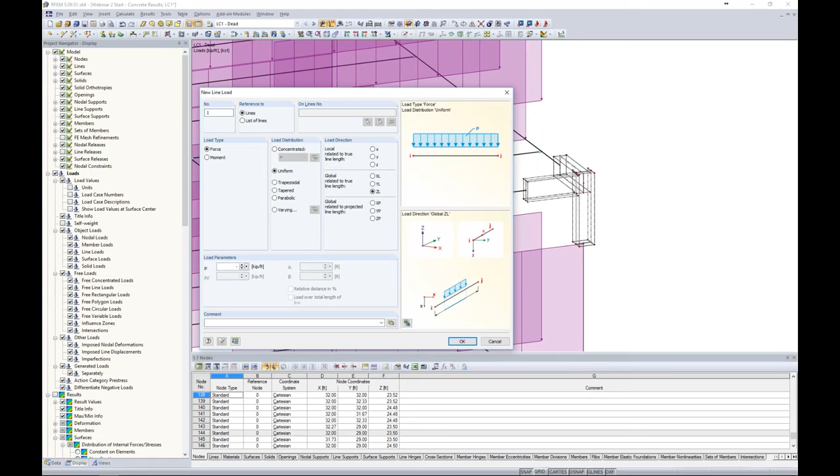In a similar sense, we can apply the same load magnitude, but this time as a new line load. Line loads are applicable for something like a surface, where we don't have a member available. We apply it in the global Z direction with a magnitude of -1.1 kips per foot. I can scroll in here, apply that to the top of this beam, and you can see it transitions quite nicely from our beam to our surface element.

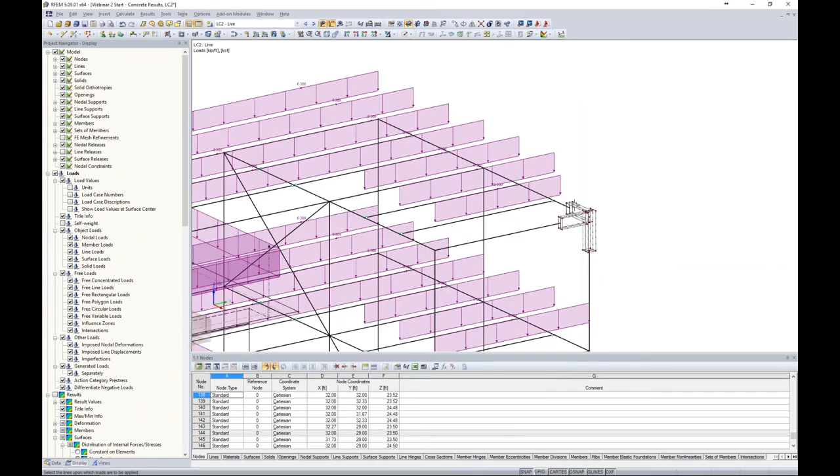The same thing can be done for our live load. We'll apply a new line load here, but this time give it a new load magnitude of 0.3 kips per foot. I click OK, and then apply that to the top of this beam.

Now we can run our first load combination. Here I'll just apply the 1.2 dead plus 1.6 live, and we can run our analysis. Keep in mind this will take just a split second longer because we've introduced these new finite elements for this connection into the program. As you can see, it still solves rather quick.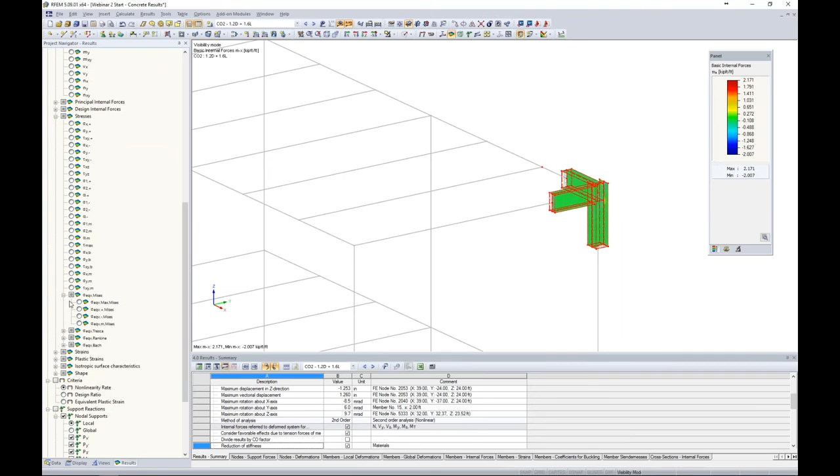We can turn off our loads, and I'm going to choose a user-defined section here, visibility by selected objects. Now under my results, I'm probably most interested not in my members, but this time in my surfaces, and under surfaces we have our von Mises stresses.

Now you'll notice the program is smoothing all of these internal forces together, just so we can have a nice pretty picture of what's going on with our connection. But in reality, this isn't a correct way to view our results. It's so important with any finite element software that we pay careful attention to how we're viewing these results, such as stresses on our surface elements.

Now with my AISC Advanced Steel Design webinar, I did an entire hour dedicated to a connection just like this, going into much more detail, but we're almost out of time today. So the only thing I want to show you is that rather than tying it together with this smoothing algorithm, we'd rather view our results under our display tab in our project navigator.

Under surfaces, the distribution of internal forces and stresses, we'll view this as constant on elements. So now each particular FE element has its own contour, and we're not trying to tie those together, and our stresses went down from 160 to 121. They're still high, but you can see what a difference that makes.

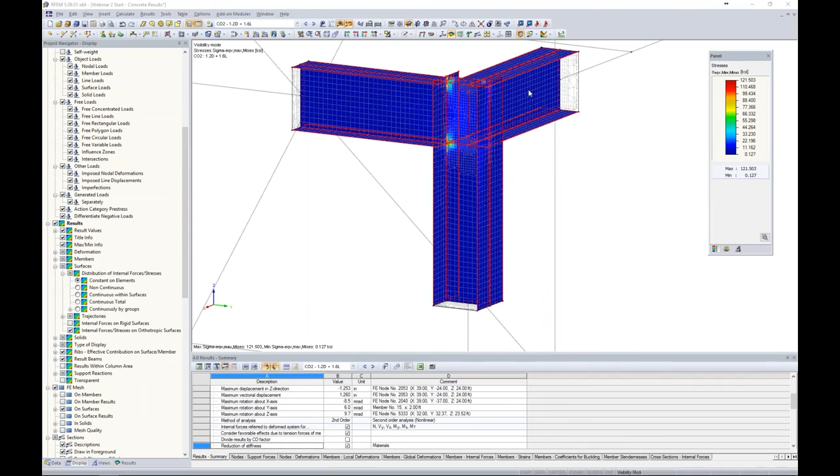So what I can do is select all of my surfaces here and right-click to edit them. Currently I'm just using the Steel A992 defined within the program — that's what all my steel members are designed for right now. But I'm going to create a new material.

Again, I'm just going to go to my material database, which we covered in webinar 1. I'm going to activate my favorites group to select Steel A992 here.

I still want all those same properties, but for my material model I'm going to choose isotropic plastic 2D/3D. This allows us to do a plastic analysis within the program.

We can get into some very complicated details here, such as tearing and yielding. We can change our strain hardening modulus, but for this example you can see our yield strength is set to about 50 KSI, and our strain hardening modulus is given as such.

I click OK through these dialog boxes, so now I've simply changed those surface elements to utilize the isotropic plastic 2D model, but all the rest of my steel elements are still utilizing an isotropic linear elastic material model.

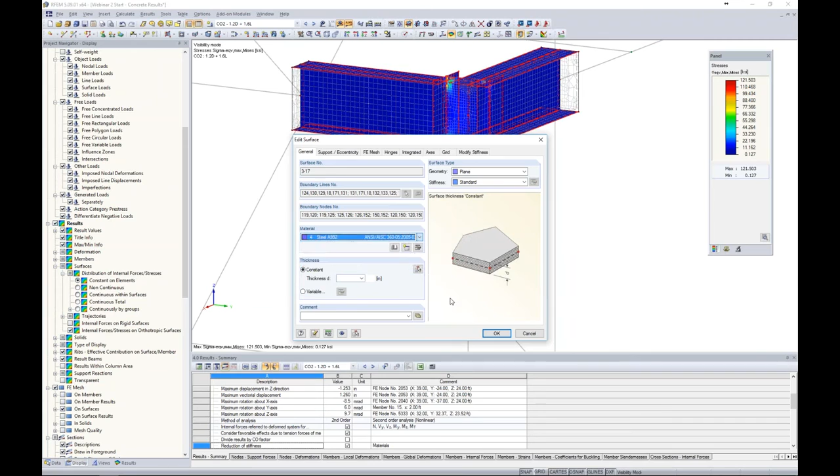So now when I run this exact same load combination, the program applies these loads to each element within this finite element connection, and the minute it reaches the yield strength of 50 KSI, that load is distributed to the adjacent FE mesh elements. It continues to do so until the load has been fully distributed. So in reality we shouldn't see a single FE mesh element here higher than 50 KSI.

Taking a look at our stresses, that's exactly what's occurring. The highest stress here is 50 KSI before that load is distributed to an adjacent element.

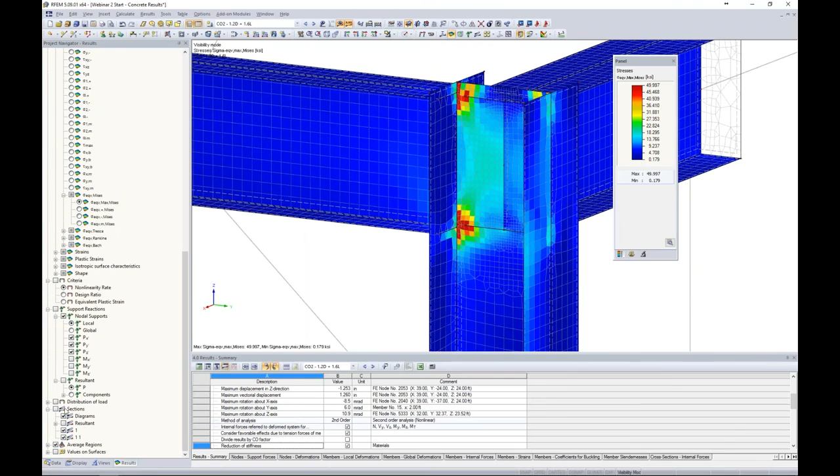We can also now view, under our results tab, an option for criteria, since we're running a plastic analysis. Criteria shows us the nonlinearity rate of a single element, so you can see exactly which elements are in the fully plastic state or have completely yielded.

Just a little interesting topic - my Advanced Steel Design course goes into much more detail on this if you're interested in a connection like this.

One more quick topic to cover before ending this webinar is a couple of printout report options. The first, which maybe some people didn't know existed, is a 3D PDF.

For example, let's say I'm interested in quickly printing this connection's details to a 3D PDF. I can go to File, Print Graphic, or use the quick tool under our toolbar called Print Graphic. We can print directly to a printer, print to our printout report, or print to a 3D PDF.

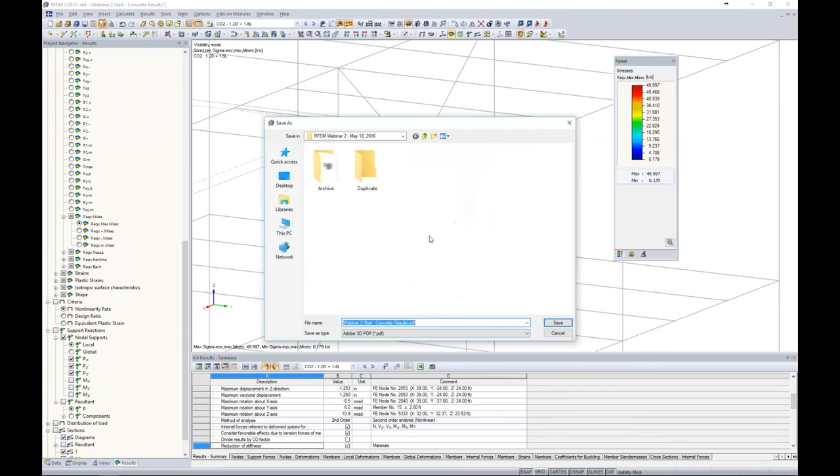When I click OK, it just asks me to save it, which I can do wherever I'd like. Then it automatically launches this 3D PDF based on my structure here.

When we take a look at this 3D PDF, here's our entire structure, and what's great is that now we can make changes to our view within the actual Adobe PDF program.

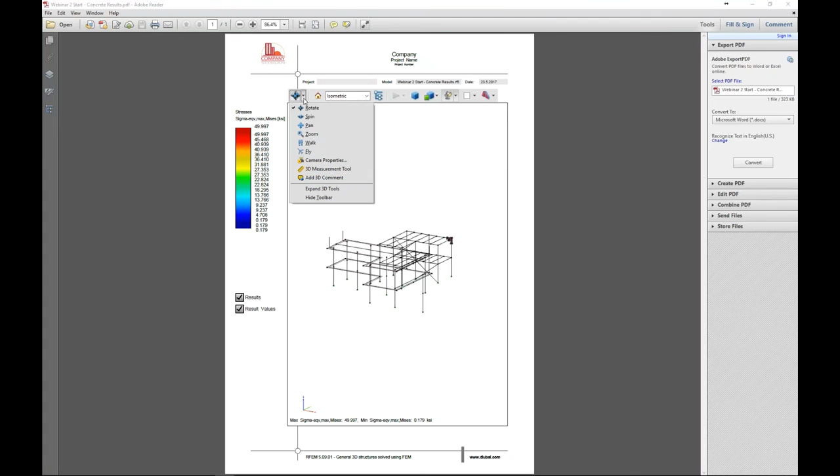We can spin it, for example, to take a look at our connection here, and use the pan tool to zoom in and really focus on this connection in particular. You can see how this can be beneficial for any type of graphic views in a 3D printout.

We can email it, add it to a printout report, or do whatever we'd like with it. Now, the other quick topic to discuss is how to quickly print off many load combinations at once for our results.

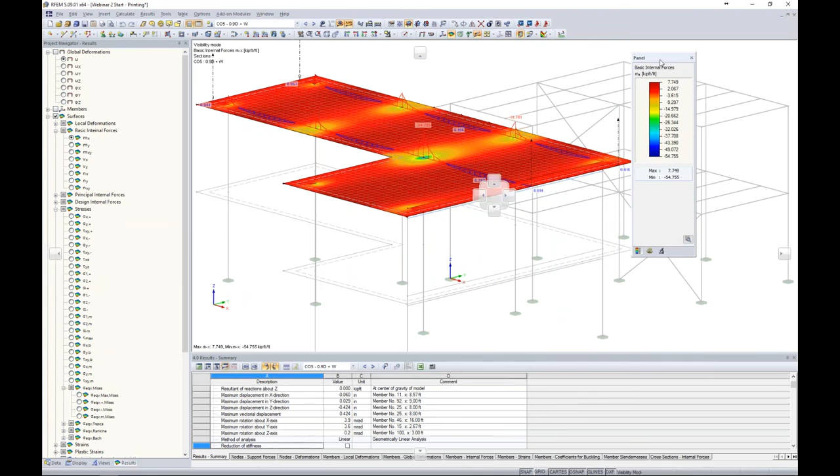For this, I'm going to jump to an already saved model, back to our concrete slab example. Let's say I'm currently looking at my MX forces for this structure, and I want to look at all the different load combinations and print this directly to my printout report.

Typically I'd have to take a picture of load combination 7, add it to my printout report, change the load combination, take a picture of load combination 8, add it to the printout report. So what features do we have that make our lives a little easier?

Under the Print Graphic report, we have this option called mass print. So I'm going to print to our printout report using the full page width, but maybe use 50% of the height to fit a couple pictures on each page.

Under mass print, this is where all of our model data, loading data, and results data is available. This is basically what we're seeing in our results project navigator. The program assumes we'd like to print off what we're currently viewing, so you can see it's showing MX for my surfaces. Instead of the current load case and combination, I want to print off all load cases and combinations. I click OK, I click OK.

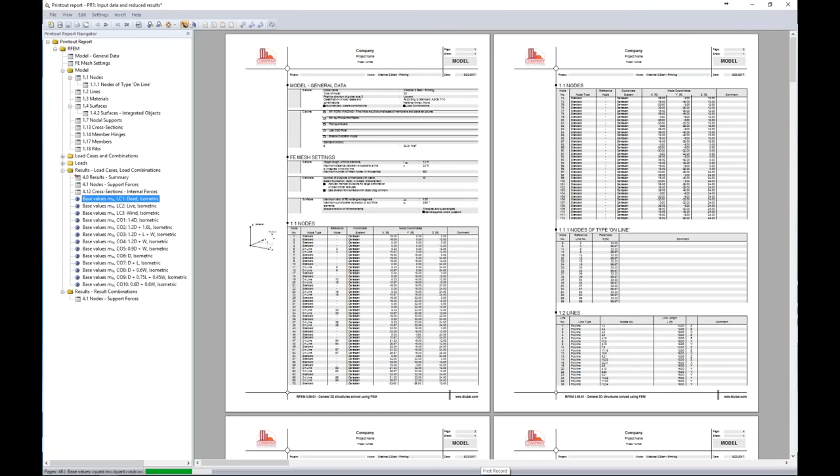Now the program asks me to generate my printout report. I can select one of the saved templates I have. I click OK, and now the program is cycling through all of the different load combinations for my particular MX internal forces of my slab, and it's going to automatically add them to my printout report.

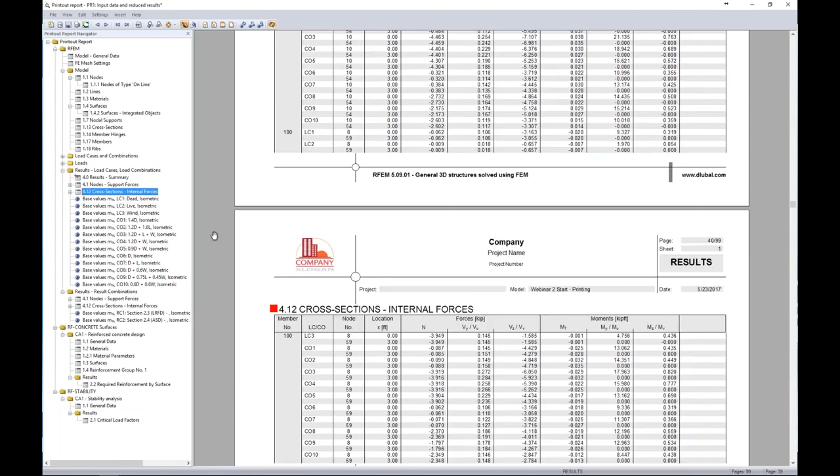Now you can see that we jump directly to where those pictures are added, and I can zoom in to show you exactly what's going on. Here's my load case 1 dead load and my applicable MX forces. Load case 2, and we can get into our load combinations 1, load combination 2, and so forth. You can see how this can be extremely valuable if we're trying to quickly print off a lot of different load cases or results at once. We can automatically do that.

Keep in mind, you can always right click to edit one of these pictures. If, for example, I don't want to see the FE mesh settings, I can go under my display, scroll down to FE mesh, turn that off, click back, and now you'll see that picture I edited is automatically updated to not show the FE mesh.

Another very powerful feature: if I make any changes to this model, including different loads or different cross sections, all of these pictures will update automatically. So I never have to worry about reprinting all of these pictures.

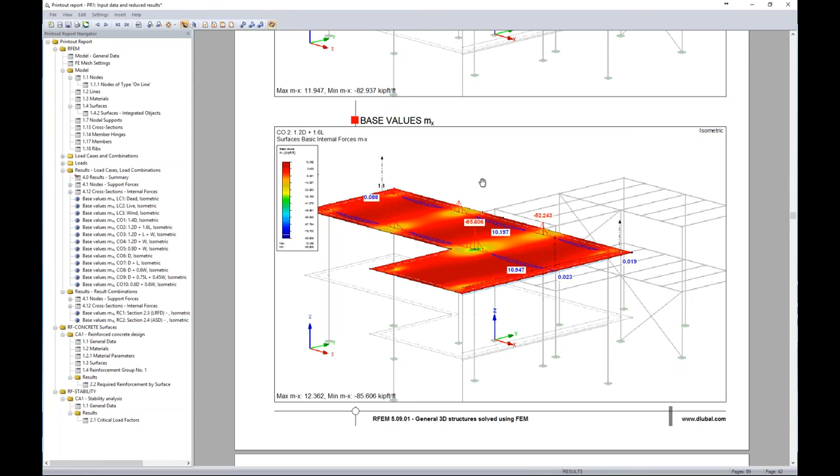I think our printout report is one of the stronger features of our program, especially in comparison to what you're currently using. You can always add your company logo and company header. You'll see all of the add-on modules are added to the printout report as well.

If we wanted to switch the order of these, for example remember running RF Stability at the beginning of the webinar, if we wanted to have RF Stability in our printout report before our design of RF Concrete Surfaces, all I have to do is select it and drag and drop it, and the program will automatically update the printout report to put RF Stability before RF Concrete Surfaces. So again, just a very powerful feature in terms of our printout report.

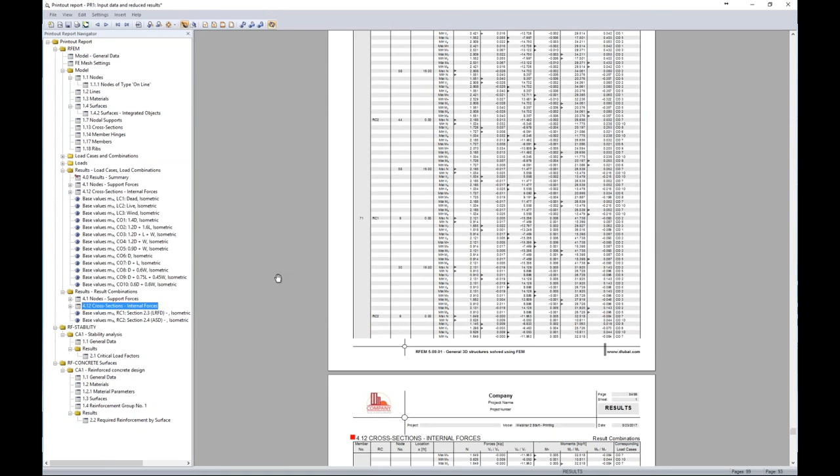So with that said, we can jump back to the PowerPoint to conclude our webinar today. I know I flew through this information, so if you're interested in any additional add-on modules or RFEM itself, we have much more available.